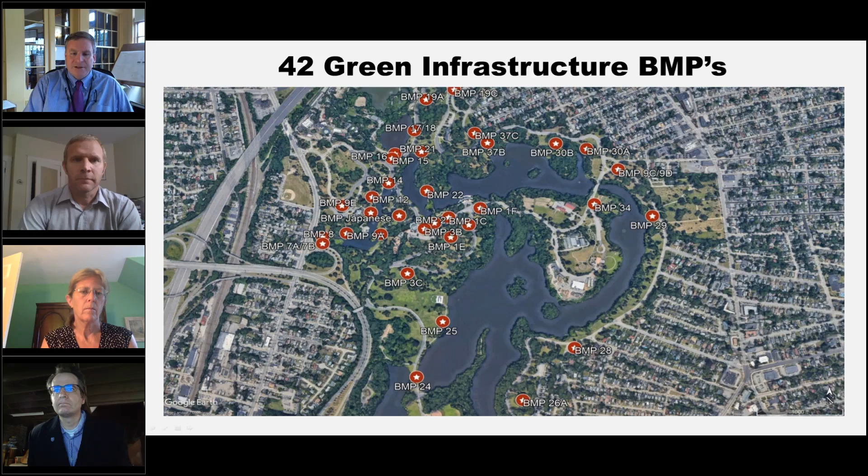The projects, 42 of which were completed in 2 years due to a funding deadline. We had 5 years to do it, but we did it in 2 years. So we had a good group on that construction project between the consultants and the contractors, and we were able to work it out. So what did we learn?

There's 2 schools of thought from what I've been learning. One is use a street or roadway as the overflow, so allow the low flow in and let the high flow go by your BMP and use that as an overflow. The other one is to bring all the water into the structure, provide an overflow pipe, and let the water flow back the same way it would as if it was bypassing it. So 2 very different schools of thought based on 2 different designers' opinion of what should happen.

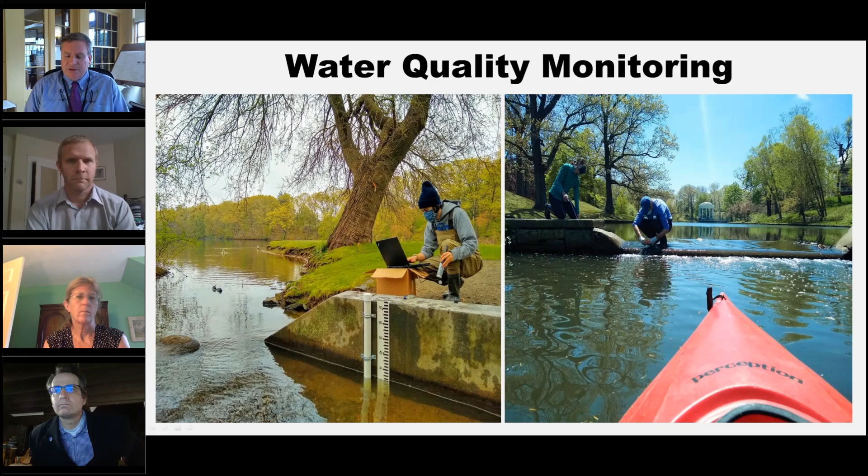So innovations in stormwater design. We want to know what you all are dealing with. If you're a landowner or a municipality, we want to know what you've done in your backyard or in your park to create better stormwater.

And that's what it is, collaboration. We want to bring everybody's ideas together, get together, talk with everybody about what they're doing, what they see. Send your information into us. We'll bring it to a common place that's globally available to everyone.

And then if you get a consent agreement, you don't have to start from square one. Hopefully we can get you to square 10 before you have to start your projects.

On the slide you're looking at now, to the right is the seal house. Way back when, Roger Williams Park Zoo had housed their seals and sea lions there, but the building cantilevers over the waterway. So a lot of our monitoring equipment is mounted inside this building, goes right through the floor into the water below. So it's a perfect setup for that type of testing, and it's been very successful. When they built the building back in 1893, maybe they had the stormwater in mind, I'm not sure.

But that will be a kiosk, not only for research, but for outreach to the public, for education. We'll bring students into the seal house, show them how it's working. There'll be video screens running with some of the stormwater things we've done and how they work. So we hope to make that a location for people to come and learn about stormwater.

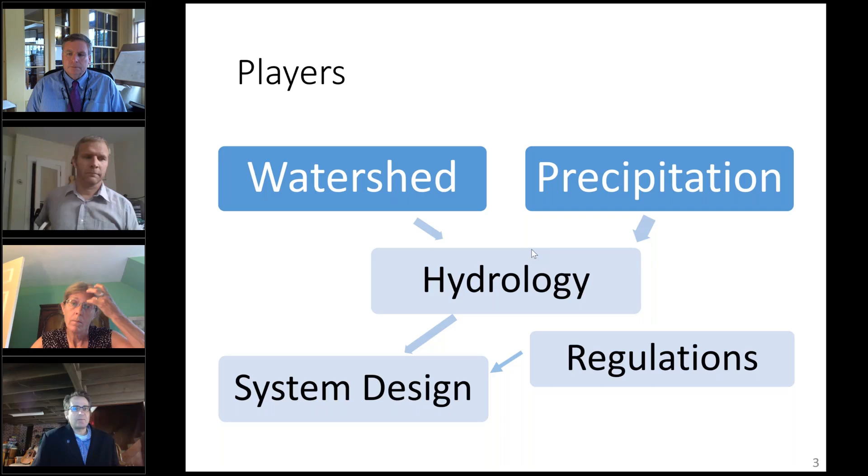So we're not generally managing the 100-year return event. Obviously, the watershed characteristics, the land use characteristics, and the precipitation, particularly design precipitation, dictate the hydrology you're designing for, and also in there are regulations. One interesting thing about making this type of information available: if you're in the field, you've found, as we all have, that the science is changing pretty fast and dramatically. In New Hampshire, our stormwater manual was passed in 2008, and that was probably a 5-year effort to develop that manual and get it into statute.

2008 is ancient now, so lots happening largely from the learning from the increase in implementation. So I'm going to just at liberty skip over some slides. I apologize for the delay in the beginning.

Obviously for hydrology you're going to need some additional land characteristics, things like slope, and I'll talk a little bit about slope as it pertains to system design as well. Then flow path, typically we're calling that time of concentration. It's one of the biggest errors we see when we review plans: people misinterpret the time of concentration. Oftentimes it's noted as the longest distance in the watershed, and that's not really the definition. It's really the longest hydrological flow path. So for the most part, at least in the hydrology, that's one of the biggest issues we see.

Beyond that, what we see in the issues in modeling is not honoring or adhering to pre-development subcatchments. One of our design intentions is to maintain the pre-developed condition to the extent possible, largely hydrologically. What I mean is, oftentimes what we see is you take your site, and where you want your stormwater feature is often known, so you delineate your site, and your point of analysis is where you want the discharge for your developed condition.

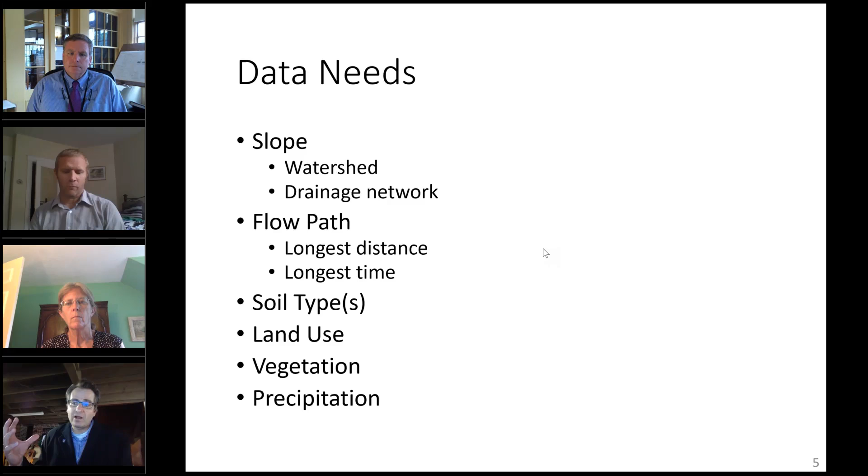And then finally, not taking into consideration off-site drainage. You have your property lines, but the hydrology doesn't always honor the property lines or the political boundaries—it honors the watershed boundaries. So you could have large amounts of water coming in from off-site. Those are the typical common mistakes that we see.

Yeah, it's one of the things we'd like to address better in at least the hydrology component. Now, getting into design...

One of the current arguments or haggling we have these days is with pretreatment. If you look at many of the manuals that are out there, they all include pretreatment as necessary. Pretreatment is often a structural forebay, and it's often sized for some percent of the water quality volume, or it also often has some volumetric sizing criteria to it.

So the question obviously comes in is, as you're redeveloping or retrofitting—or even for new development it's not as big of an issue—this idea of the configuration of the pretreatment, what does it look like? And I think we have more options than many of the manuals allow these days.

If we go back to the intention of pretreatment, it's to facilitate routine maintenance. So you want a place to take out the shopping carts and the bowling balls, the large coarse solids, and you want something that you can maintain easily and more frequently. That's largely the intention.

There was never an intention that the forebay offered some type of flow control or water quality control. It's strictly for ease of maintenance.

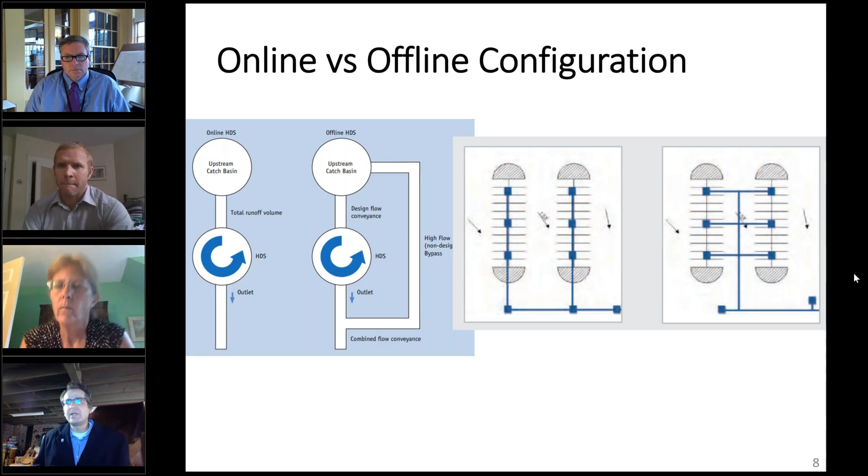So this is the coarse stuff. Some of the gross litter, leaf litter, and other gross solids get removed here and can be easily maintained. If you're trying to maintain these street trees or tree filters in the cityscape, a lot of times they have grates that are difficult to remove, and oftentimes we don't have equipment for this. For the most part, our go-to maintenance is a Vactor truck, and you can't really do much with a Vactor truck here.

So this is one of the things that I think will happen over time. We are planning a maintenance course, and I expect we'll see innovations in maintenance tools as we understand the maintenance. Right now, I can say pretty safely that in general, the go-to maintenance operation is just neglect. That's not everybody, but for the vast majority of stormwater treatment systems out there, I know I've written a bunch of operation and maintenance plans, and I know exactly where they go when we hand them over.

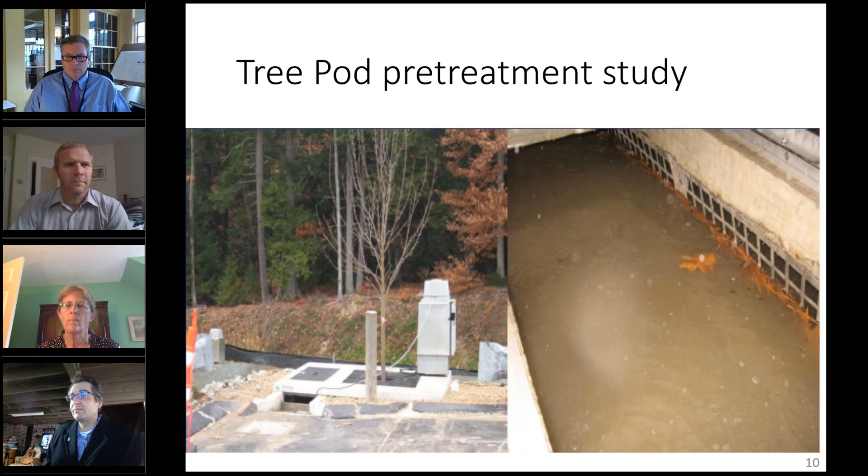So I'll move into this - essentially, I am only going to be focusing on the enhanced treatment systems, what we would call filtration and infiltration best management practices or stormwater control measures. For the most part, as we enter into the 21st century, if the state manuals haven't gone there yet, many of the local requirements - and particularly if you're from Massachusetts and New Hampshire, we have the pleasure of not having primacy over the Clean Water Act. EPA Region 1 does, and they've written our permit for us, which has some pretty stringent parameters around requirements for stormwater controls. For the most part, while they don't do it explicitly, implicitly they're requiring filtration and infiltration BMPs because they're requiring increased removals of sediment, phosphorus, and nitrogen.

And certainly, if you're in the stormwater game, you've probably witnessed in your career this transition from a huge focus on TSS and sediment to now a larger focus on bacteria and nutrients - nitrogen and phosphorus. So we're a long way away from where many of these manuals were written, and most of the water quality guidelines now focus on nutrient control. If you're coastal, it's nitrogen; if you're inland, it's phosphorus for the most part. So I'm going to focus on filtration and infiltration BMPs, and that's largely how the rest of this is going to really be parsed out.

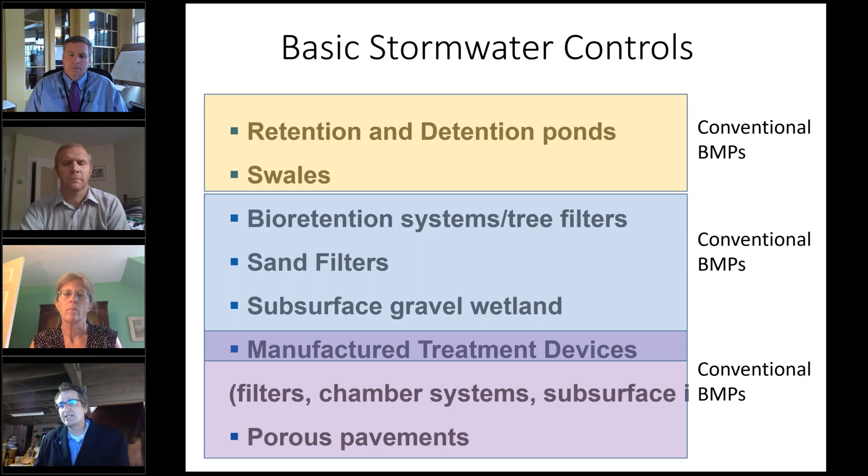Bioretention systems, I think, are the primary systems we see from a filtration perspective. It's important to note that filtration systems are typically volumetrically sized, and they can infiltrate—but they may not. So they're versatile in that you can put them in areas where you wouldn't put infiltration systems, say where you have concerns about contaminated groundwater or the general geology—it might be karst, or if you're in Pittsburgh, you're concerned with acid mine drainage and nobody's putting water into the ground. In that case, these systems would be lined, either with a compacted soil liner or an HDPE liner, but you still get the filtration function.

If you're putting a bioretention into a good soil and anticipating a lot of infiltration, that infiltration will really dominate the performance of the system. We see that the hydrology of these systems dominates performance. This is another area of research—I'll get into it when we discuss infiltration—but there are lots of preclusions on infiltration, and for good reason, though there might be some over-conservativeness there.

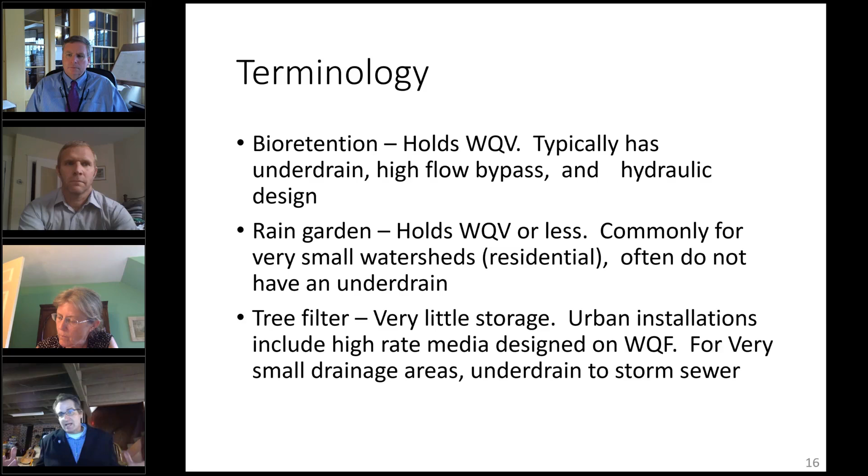So it goes without saying that there's a lot of cooks in this kitchen. If you Google bioretention design, you get 381,000 results in 0.03 seconds, and some of them are going to work really well. Our friends in Connecticut pop up very easily - they've got a really good updated manual and standards, but you'll also see a range of different criteria. I don't know how many of them are tested.

We're in a transition stage where we're replacing some of the old Maryland manual standards, because for the most part, if you open your design manual from any state, you're seeing the majority of content that comes right out of the Maryland manual that Center for Watershed Protection did for Maryland, the birthplace of LID, 30 years ago. Not a lot has changed, although we're slowly updating the standards. But if you've been involved in updating a manual, it's not an easy task - you don't just write it and put it on the web.

These are typically the components of the bioretention system. Again, you have a forebay - here we're showing a structural forebay. This is kind of like our own schematics, and cartoons are a little bit antiquated, because we're showing a structural forebay. I've already gone over the fact that we look at the forebay and pretreatment a little bit more flexibly now. It could be any pretreatment structure - could be a hydrodynamic separator, could be an offline deep sump catch basin. But whatever it is, that then goes into your main treatment cell.

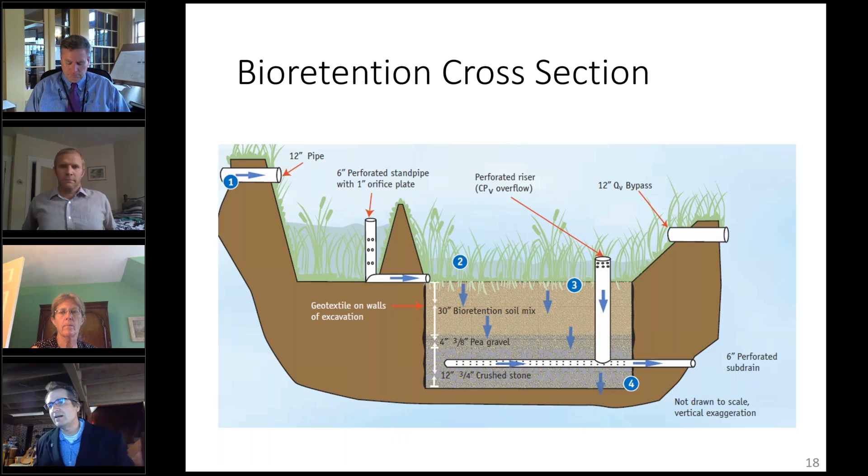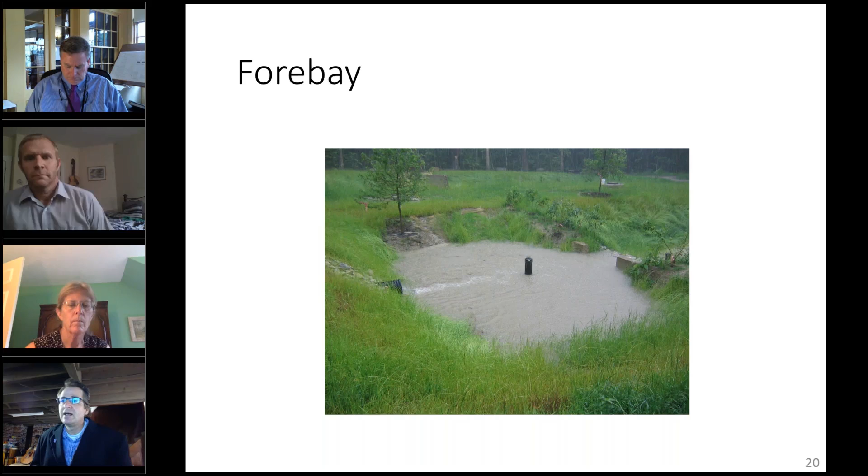Just cruising through some pictures. These are some of our early attempts at large structural areas that treat large drainage areas. This one treats about 1 acre of impervious surface. We got rid of the forebay really quickly because we found it was very difficult to maintain, so we went for a low profile instead of a huge volumetrically sized structural forebay. We just had a berm of stone that gave us separation and screening for the shopping carts.

We've also been experimenting with these curb installations, where we introduce a curb cut and excavate a depression. Nobody can tell me why every single median strip out there is mounded. The best explanation I've heard is it's a liability to prevent cars from getting stuck, and I have seen cars stuck in bioretention systems, so it could happen—people pop the curb and the frame of the car sits on the curb with the wheels spinning. But if you go to any mall anywhere in America, you see these median strips are mounded, so it becomes a kind of negative space.

So it's an opportunity when we're looking at retrofit. We have a nice no-cut zone because we often see planting material just get weed whacked as people are mowing these areas conventionally.

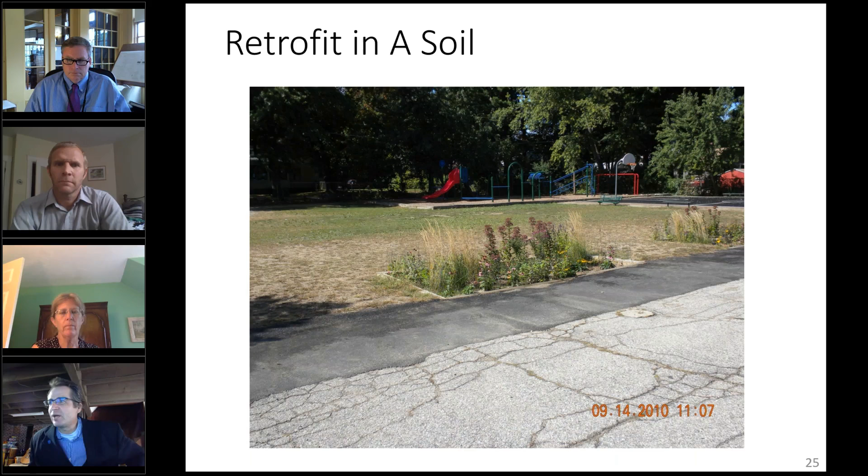I love a drop inlet because gravity never fails. However, if you're having an at-grade inlet to your system, you have to make sure the opening is wide, and that the slope into the system is aggressive enough that the water changes direction.

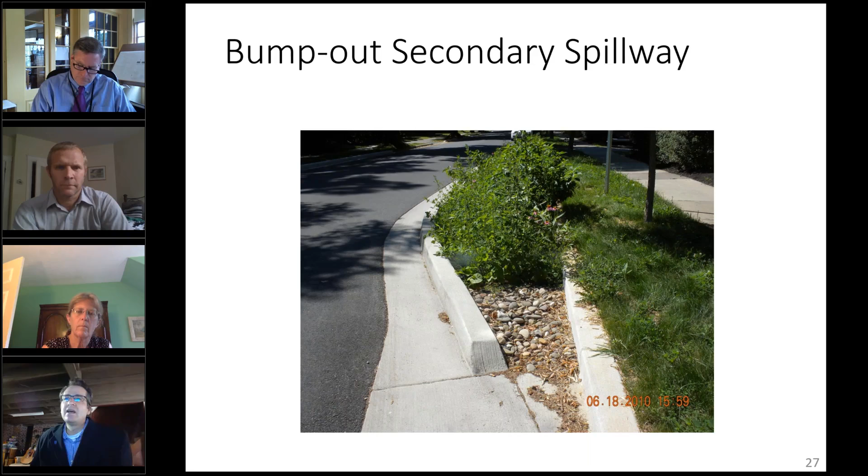These are very simple things we can correct. The other thing here is, I can't really tell, but if I'm a drop of water, I'm looking at this grate and saying, that's where I want to go—I'm not looking at a huge turn, a 180-degree turn, into the system.

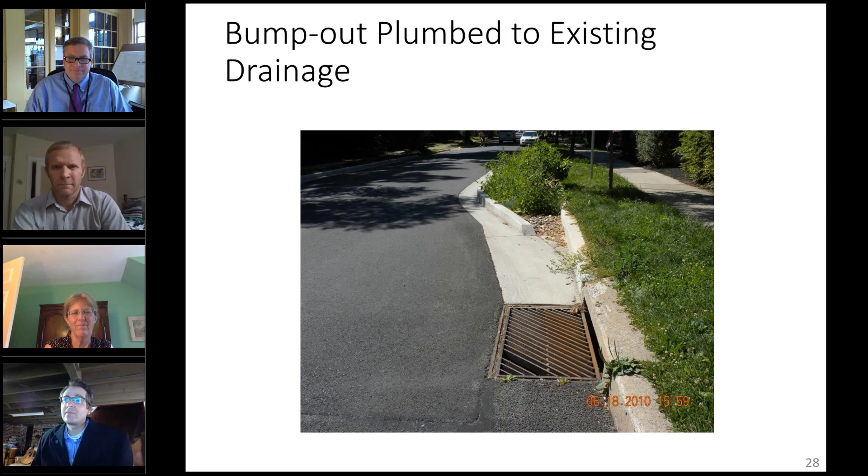Tree filters are out there. They are very simple in nature, and again, we're trying to do the research. Now, trees have lots of ancillary benefits.

If I were to design something, I could not in my whole entire lifetime design something as amazing as a tree, something that produces its own food, sequesters carbon, provides habitat, releases oxygen. The list goes on and on.

However, we have not, in a stormwater application, pinpointed the exact functionality from a water quality perspective that the tree actually has. Obviously it's something, but again, the filtration component through the physical filtration through the media probably dominates the performance of these systems.

Tree specification is something we're working on. Myself, we generally spec out a red maple. However, there are other trees out there we'd like to look at, just not a lot of data here. We do have a publication I'll link to you, where we worked with our urban forester to at least identify street trees that could be used.

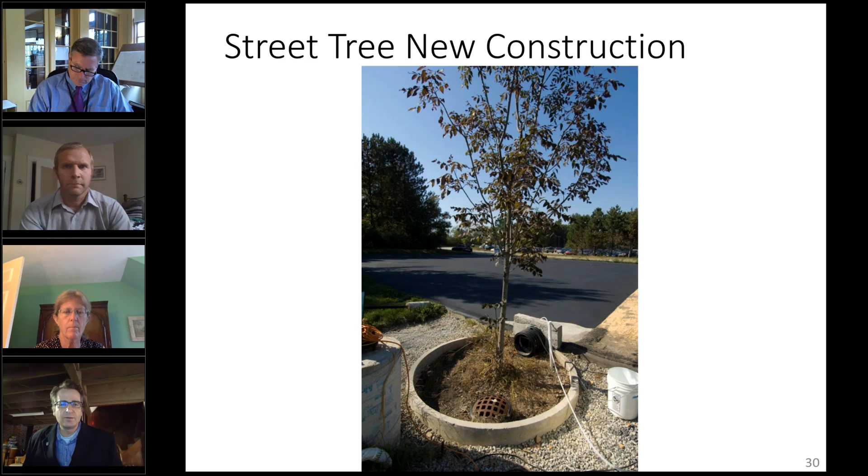I'll just cruise through here. There's retrofit potential for these adjacent to existing catch basins. This is just an example of a very simple installation we've done, where we just dig out adjacent to an existing catch basin.

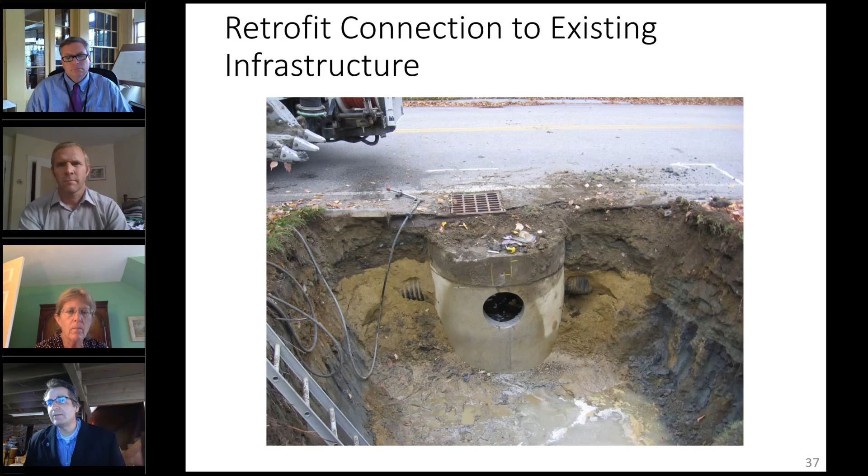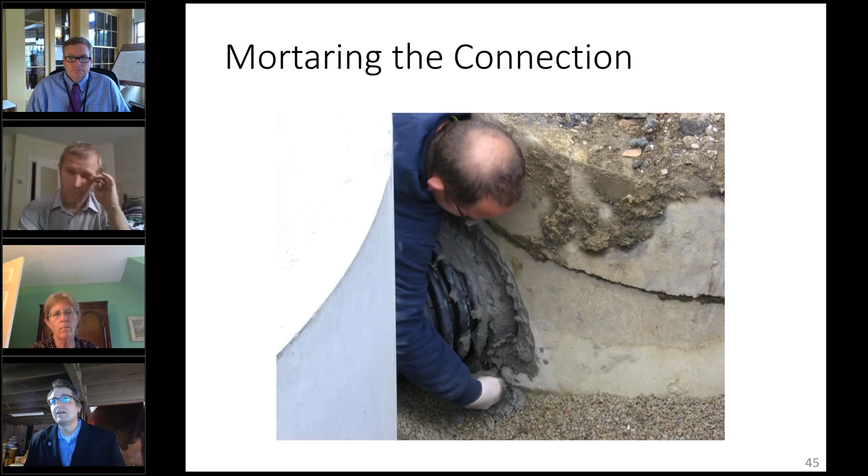We essentially excavate, core into it, backfill with stone, drop what is basically a manhole riser, backfill, connect that to the existing catch basin, backfill with stone, soil, provide our overflow riser, provide our inlet, plant our tree, and then put a solid cover on the tree filter. We've done this in retrofit applications to enhance some water quality benefit into the existing landscape.

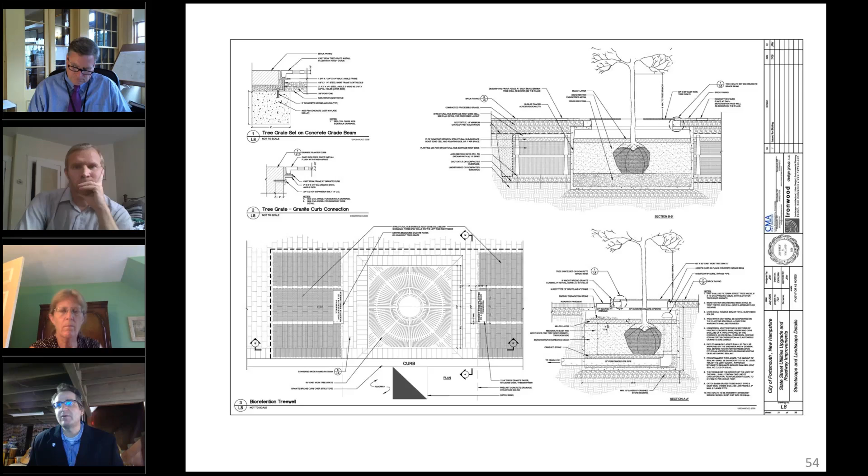There are other proprietary devices that can do this as well. This in particular is a tree pod. We've also worked with cities to install large structures in the cityscape that provide some benefit of a street tree, but also give an area for the tree to expand and grow, and provide us some water filtration benefits. So those are just some examples.

If we look at design now, there are three main design methods out there for these types of structures. One is to do a dynamic sizing based on an iteration of Darcy's law. This is the equation you see here, in many manuals, where you calculate your area of your filter by your water quality volume, multiplied by some dynamic infiltration capacity.

If you're using 0.05 inches an hour, this is not going to work out in your favor. But typically what we'll do is anticipate an infiltration rate and multiply that by 0.5, taking a factor of safety of about a half to build in some potential clogging. That is very, very conservative, I think, and you'll see why in a minute.

The other ways are static sizing, where you just instantaneously plunk the water quality volume into your system, and you can use it, or develop a runoff coefficient that's in many of the manuals. I'm really loving this Philly method here, where you calculate your water quality volume only based on impervious cover, essentially not including pervious areas, and I'll tell you why.

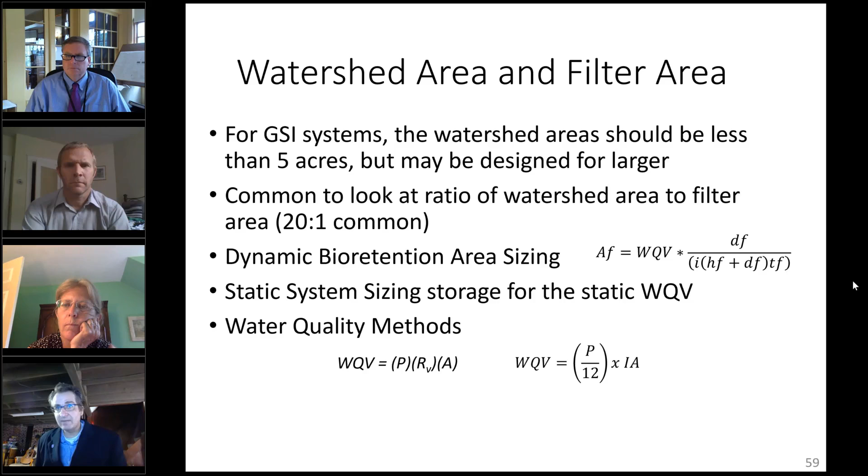So rights of ways, I kind of covered this a little bit. In general, we're not putting these systems, if we're anticipating infiltration, in areas of high pollutant load, or we're lining them. We'll return to this when we talk about infiltration. There's lots of soil restrictions when we look at systems being installed according to some of the state manuals.

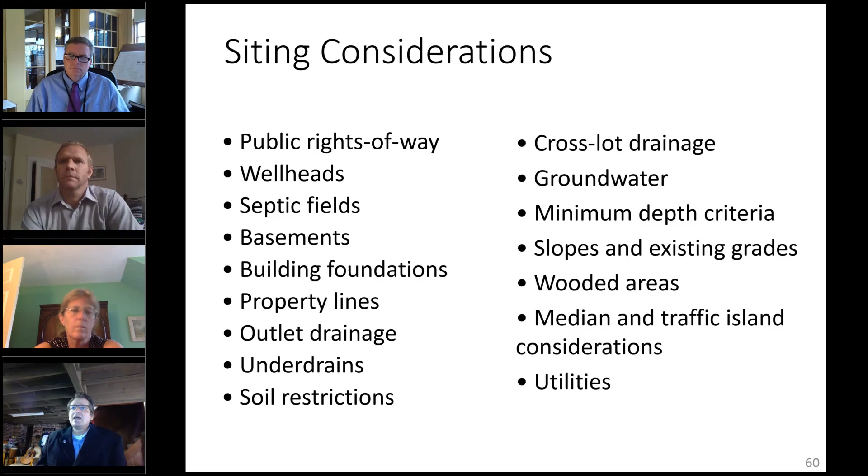But I wanted to just focus on slopes, because oftentimes we hear that these types of systems can't be installed in areas with significant slopes. We have installed them in the past. Generally, what we do is we want the surface of the system to follow the landscape slope.

Here, this is a roadway where we install the bioretention. The top of the media follows the 3% grade on the adjacent road, and we do that largely to maintain a consistent system. Otherwise, if we kept the surface flat, we'd have a huge hole in the front and level out in the back, and we really don't want that—think cars being trapped in the bioretention system. Not a good photo opportunity.

So we like the top to follow the grade, but the bottom we design to be level. So the bottom gets terraced. While the top follows the grade, our bottom basically steps down. Here we have basically 3 steps down. The system is about 100 feet at a 3% grade.

Every 33 feet, we go down a foot or so, and we just terrace it. So we have 3 basic bays here, so that the bottom can remain flat. We do that largely because what we worry about in sloped systems is concentrated and accelerated flow along the confining layer. The confining layer at the bottom of the system is where the stone meets the native soil. If you don't have restrictions there, you can get accelerated flow along that layer, and you can get pushing and piping and soil disturbance, which affects the integrity of our system.

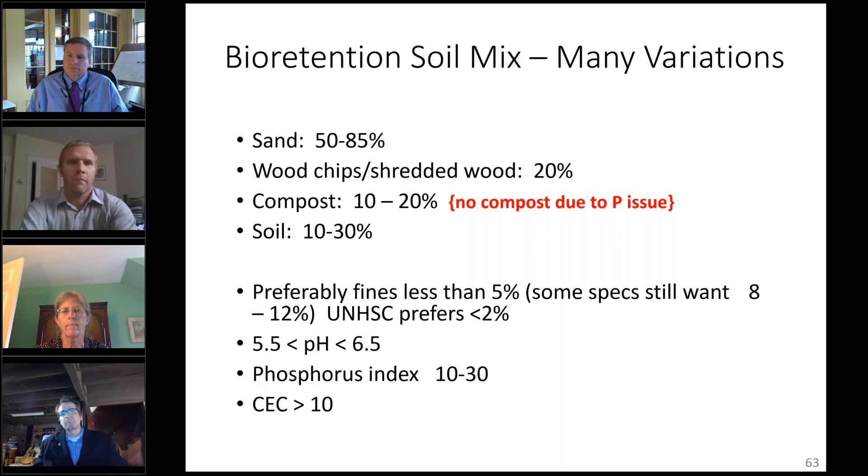And then we can get kind of experimental with our compost loams and soil amendments. Sorry, I kind of skipped ahead of myself. Here's the particle size distribution that we've developed. Again, this is on our website.

I might be able to show you that real quick. Let me see if I can do this. I'm playing with fire here. Playing with fire. Where did that go? No, I'm not going to do it, guys.

UNHSC, Google it, we're the first thing that comes up. If you go to our pub specs and info, we have detail on bioretention soil mix. It has some of the ratios and components, and also a particle size distribution that is a way you can test and make sure hydraulically that your system's going to stand up.

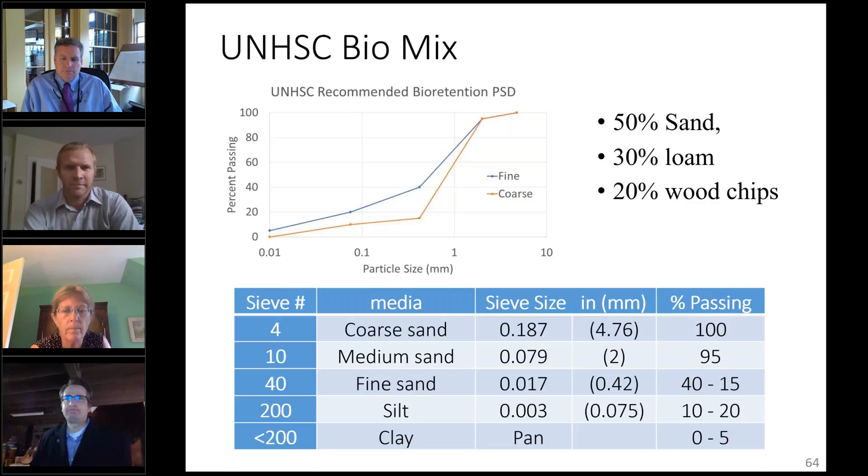Good. The last thing I'll talk about is, I told you to get rid of geotextile in the vertical cross section, meaning the unmaintainable layer. If I put geotextile under 24 inches of bioretention soil mix, you're going to move heaven and earth before you get anybody to maintain that, right? You'd have to excavate your whole entire system.

Where this doesn't apply is when it's accessible or maintainable, such as in isolator rows in chamber systems. Oftentimes a woven textile is used in the isolator row, and that's fine. It actually does a great job of filtering. The woven textile is stronger and doesn't clog as readily as non-woven, and we're finding it creates an organic humus on top as it removes organic debris and other things, which accentuates phosphorus removal.

Those are fine, you can open the hatch on a catch basin and get a hydrojet down there. It's accessible, it's cleanable, it's maintainable. A geotextile between the bioretention soil mix and the stone layer in a bioretention system is not. So we generally eliminate them.

And what we use is a graded filter specification. This comes out of Federal Highway, and it's also used by the Army Corps of Engineers. It's basically an inequality calculation between your fine materials above coarse materials. If they satisfy these 3 inequalities, it can perform as a setting bed, meaning you can be relatively assured the fine materials won't pipe into the coarse materials.

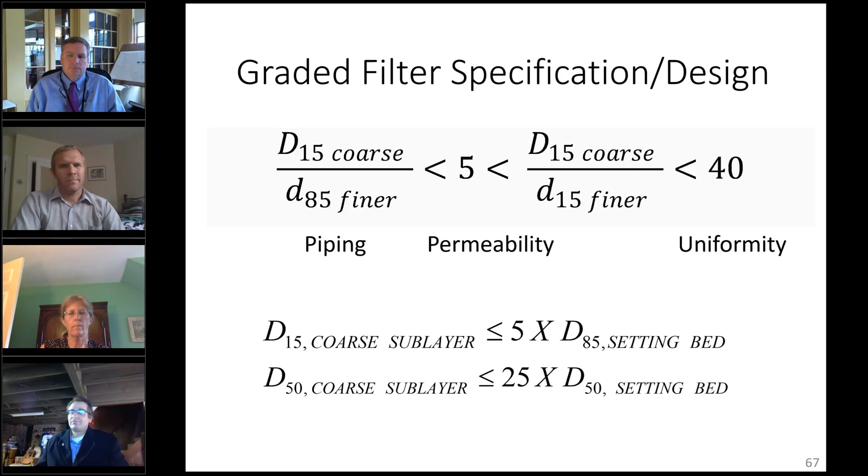Now, amendments, because of this phosphorus removal capacity and the lack of ability, as we move these soils to higher and higher flow rate and infiltration rate, means we go to more organic material. If you think of a rain garden, a lot of it is 50% compost, 50% loam. That's going to have plenty of organic material, plenty of absorptive capacity, and it might even be leaching if that compost is not a low P compost. So what do we do? We don't want that happening in our phosphorus threatened waters.

Now we have to look to some type of amendments. And this is where it gets fun, because we can kind of Frankenstein these things together such that we're better addressing our pollutants of concern. So there's a lot of proprietary stuff out there, absorptive material for phosphorus binding, enhanced phosphorus scavenging.

We found essentially zero valent iron and a drinking water treatment residual that we post-process to be really good and really cheap at scavenging phosphorus. There's a PhD finishing up at University of Vermont publishing on the use of drinking water treatment residual, and basically confirmed what we had already found, that you can get anywhere from a 20 to 85 year lifespan out of the use of a drinking water treatment residual at about 5%. Same thing with zero valent iron.

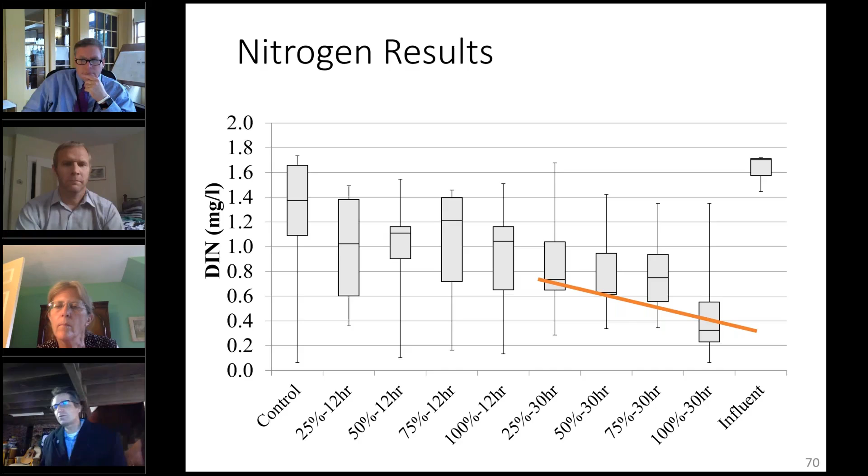So we have a design specification for a hybrid bioretention system because we have nitrogen problems here on the coast, and the criteria is enhanced nitrogen removal. If you're in good soils, there's no way that you want to line that entire thing. So what we're building - and I don't think I have a picture of it, but it's on our website - is a first flow cell through what's essentially a subsurface gravel wetland in the middle of a bioretention system. I'll go over that a little bit more when we get into the gravel wetland.

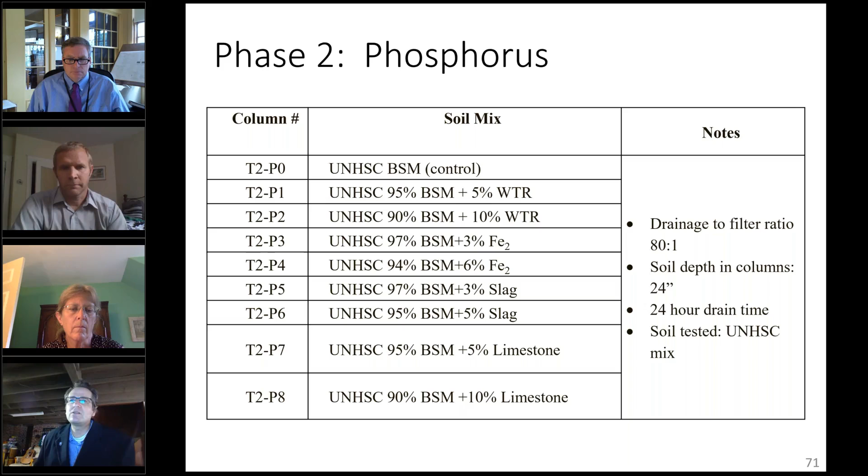We've also seen the use of expanded shale aggregate, and it all comes down to cation exchange capacity. We've done studies on expanded shale, and what's interesting is they come from different parts of the country, and some parts have a higher charge than others. We found the stuff coming out of New York to be really good - high cation exchange capacity, really good phosphorus removal. So just something to consider, that there's natural products that can be harvested, that can be used, that have this cation exchange capacity that we're basically amending with the use of polyaluminum chloride. Not to mention that it's a waste product.

Again, if we can reuse it, the university and their drinking water treatment plant will give this to us all day long. So very good removal here. And then, like I said, we've seen about a 20 to 85 year sorptive capacity with typical stormwater phosphorus loadings.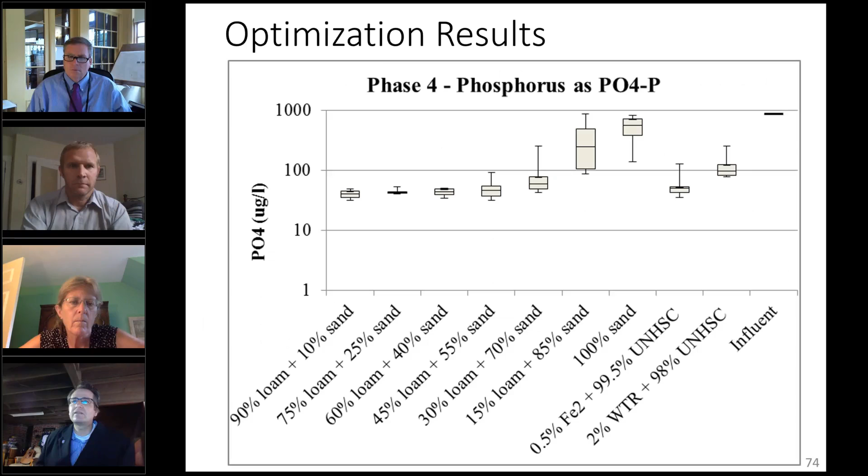So media thickness, often a question. Again, anywhere from 12 to probably 30 inches is what's most common. For the most part, because much of the physical straining is happening within the top few centimeters, you're probably sizing media thickness more for vegetation sustenance.

If you're using media amendments and you're increasing the residence time, you're largely doing that through some outlet control, like orifice control or something in the outlet. You're not really designing that into your system.

So I talked a little bit about this internal storage reservoir. For the most part, you can see a detail on our website where we're getting away because we have some empirical data on something that's 10% of the water quality volume. So our internal storage reservoir, the physical storage capacity in the length and width of this kind of first flush flow cell, is 10% of the water quality volume. Sounds familiar, sounds a lot like our pretreatment sizing of our structural forebays.

And we're finding that those do well as long as we can keep the residence time in there. And we also see that nitrogen, and phosphorus for that matter, is very first flush weighted, meaning it comes off in the first 1/10 to 2/10 of an inch.

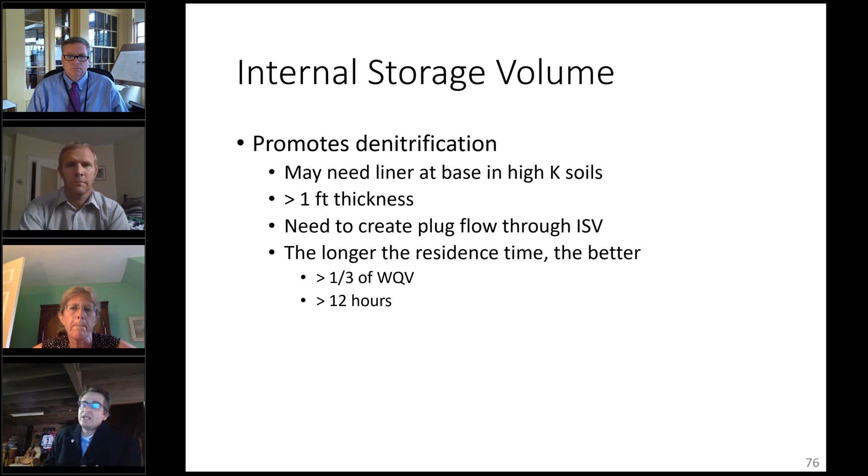So what the plumbing of that looks like is basically in your reservoir stone, you're just creating a saturated zone with an elevated outlet. And oftentimes, if you're in good soils and you're lining this somehow, and you're lining it not only in the sidewalls but on the top, what we're doing here is trying to create plug flow. So if you didn't have this liner in the middle, water would come down and just short circuit this whole reservoir and go right to the outlet.

So here we're basically creating this flow path that runs linearly along this liner, installed at a negative slope into the stone, and then through 15 to 30 feet of flow through the saturated zone.

So again, we've installed two of these, but our Department of Environment is requiring them more and more for nitrogen control. And it's exciting to see more engineers get into the business of doing this. It's fun, it makes the design a little bit more interesting. And every time we install one, we learn a little bit more.

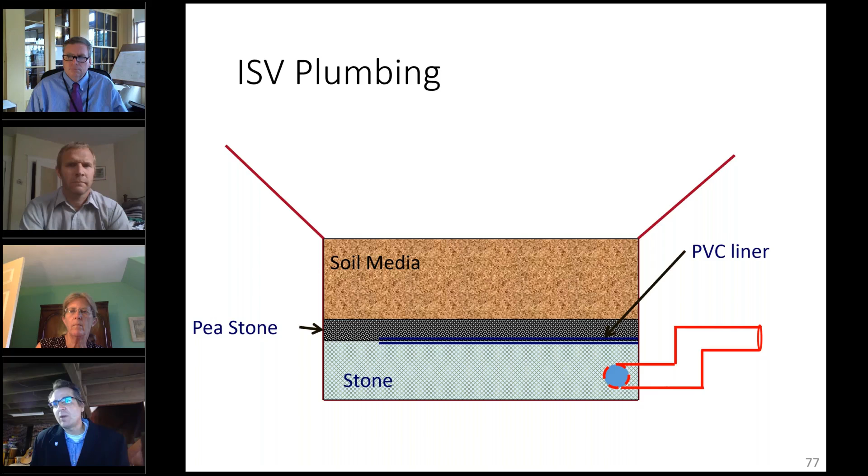Okay, to mulch or not to mulch. So I think Roger Williams Park is a no mulch facility. Is that right? Yeah, so I'm in the no mulch camp. There's plenty of people that I know that are in the mulch camp. I think it depends on your area, the level of maintenance you want to do, and how your crew is set up for maintenance. For my purposes, I'm usually designing larger systems that treat larger areas.

And no matter whether the mulch is triple shredded, quadruple shredded, hardwood, softwood, wood floats. And so if we're directing a lot of flow into an area, we always see that mulch shift and push, particularly to the back of our system where our high flow bypass contingencies are. And you can see some of that happening here. This isn't even a mulch system, this is just normal debris from some of the vegetation, from some of the organic material that's been collected in here, pushed to the back.

And it's usually why we use beehive structures as opposed to flat structures on our high flow bypass controls. If you use a flat surface, then you have a one-dimensional clogging front. If you use a dome, you have a multi-dimensional clogging front. So you can see I'm clogged here, but as the water rises, it's going to access more area because of the dimensionality of the dome. So something to consider.

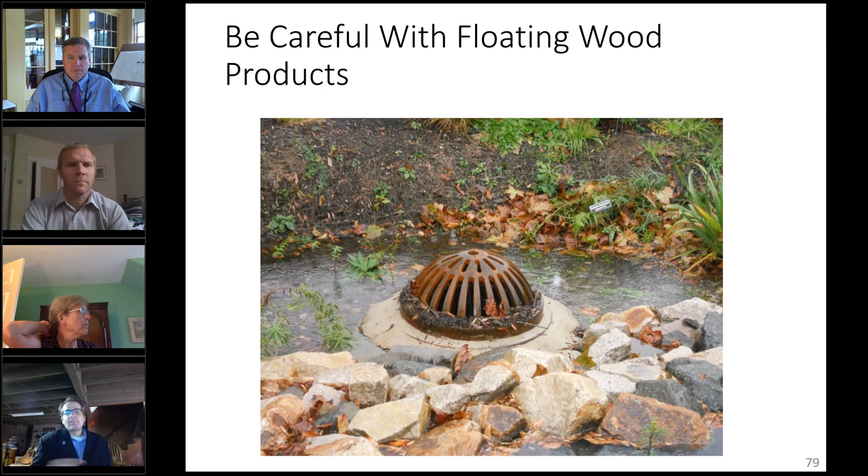Drain downtime is another design contingency. Oftentimes we see bioretention systems, people wanting to use them for peak flow control as well. So it's possible you're building a larger basin, a smaller filter area within a larger basin, and you want to allow for more storage depth above the filter.

In general, we see ponding depths of anywhere from 6 to 24 inches. If it gets above 24 inches, then you're doing two things. One is you're potentially changing what types of plants might occupy your system—they need to be able to withstand that inundation.

Two, you're also creating a driving head that could push material through your filter system and push some of the fines out. We did design a sand filter with a 6-foot ponding depth, and I wouldn't recommend it. It didn't get very good performance, and we felt that buildup of driving head pushed stuff through that filter and led to lessening of the physical filtration capacity. So, 6 to 24 inches in general. There are instances where you might get away with more or less—at that point, it's just engineering judgment.

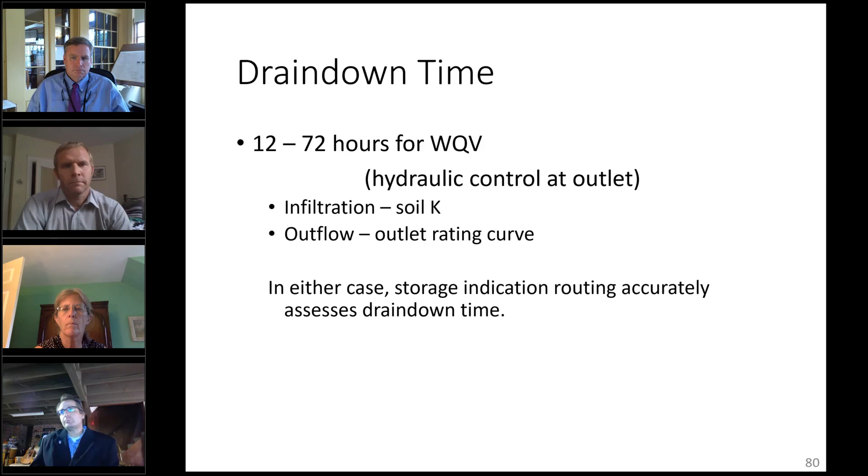And then vegetation. I've really taken a laissez-faire approach to vegetation. My point would be, I'll take whatever I can get. We're so behind in stormwater management, I kind of feel like if you want to grass it, great, if you want to plant it, great. This might sound to some folks like I'm a plant hater, but I just think we need to do more.

I'll illustrate some of the lack of detail that's out there—there's not a lot of good sources for information on plants. In our manual, and I can pick on New Hampshire, the 2008 design manual tells you for plant selection to use this national list of plant species that occur in wetlands in the Northeast—facultative wetland plants. I guarantee none of the plants selected here will survive in bioretention systems designed to the updated specs for soil, because if your system is 50 to 85% sand, it's virtually a desert to facultative wetland plants.

So it's kind of funny to me—this is still there, still in our manual. It's a good illustration of how much more research we need on the plant side. Most manuals are out of date like this. And if I can save you a few thousand dollars on plant species, then my job is done.

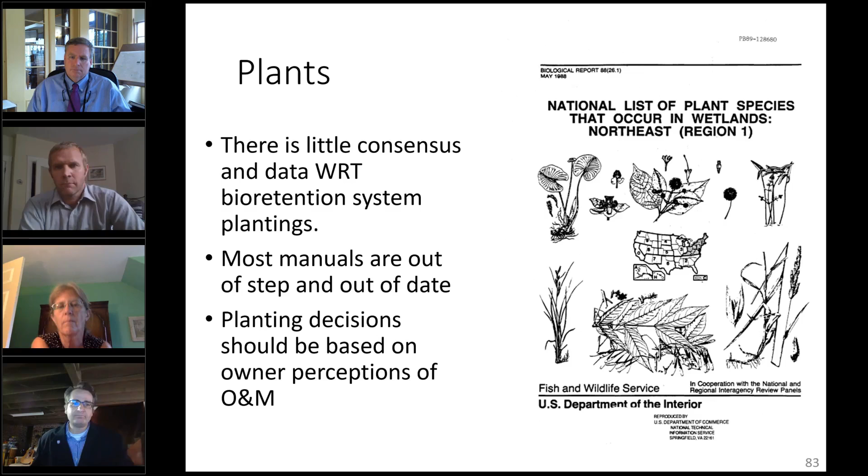So there's that. For trees, I put our link here. If you go to the front page of our website, we have a report—not actually new, but new online—with our urban forester that identified different tree species that could potentially be used in these tree filters. So that's something to take a look at. We haven't done a lot of research on it, but...

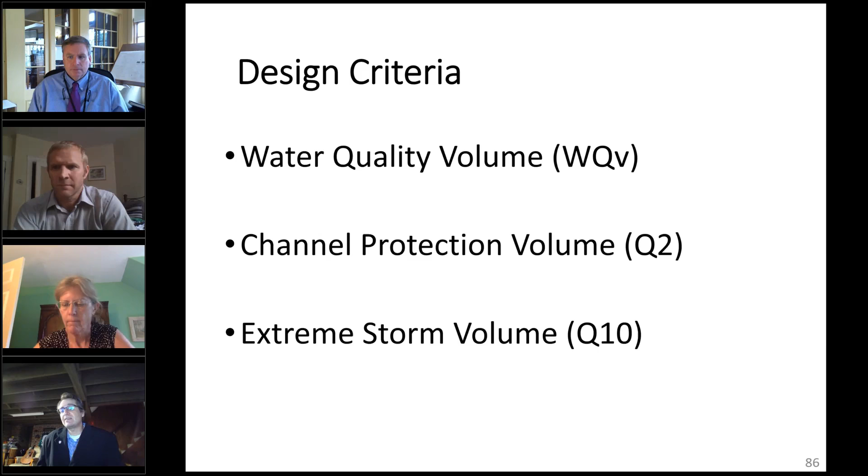So the critical design elements really are some form of pretreatment. Again, it doesn't have to be structural. We've designed these with offline deep sump catch basins, and they work fine.

I just published a paper that's on our website on the history of the gravel wetland. If you want to look into it, it was traditionally used as a wastewater treatment facility. If you go back into the old days in South Burlington, John Todd, who worked with Living Machines, actually successfully treated 500,000 gallons of raw sewage through a wetland system filled with different microcosms and ranges of plants. That's really where this emanates from.

However, this application is very different. The key feature here is water moves horizontally through the subsurface of this system. And we studied a 2 treatment cell system.

We did 2 treatment cells largely because the design specs were largely adopted out of the wastewater field, and we wanted the ability to shut something down if it got foul. So we could shut one of these basins down and route everything through one of the other ones. I think that's a contingency that likely came up when they were considering back-flushing these if they're being used for a wastewater type of application.

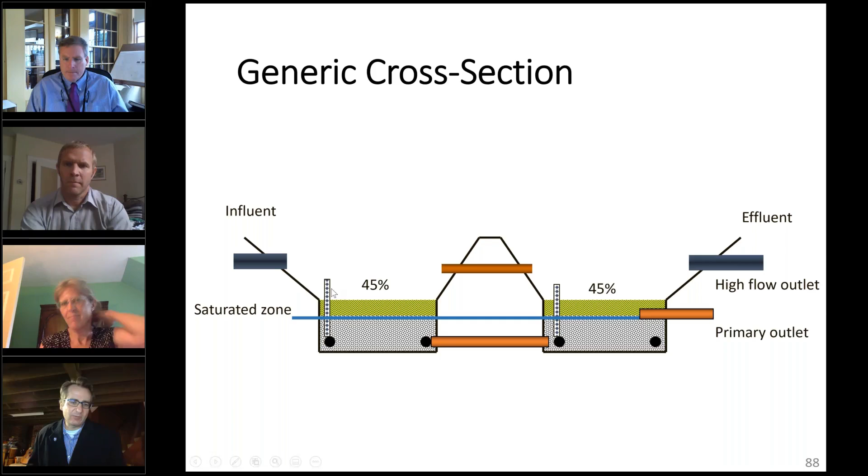So we're not anticipating vertical infiltration through the soils - that would largely tend to short circuit our plug flow. So we have some type of hydraulic inlet at the front. Here, it's a perforated standpipe. There's other configurations that I'll get into, and we want water to flow down into the system - down through the system and horizontally through the saturated stone.

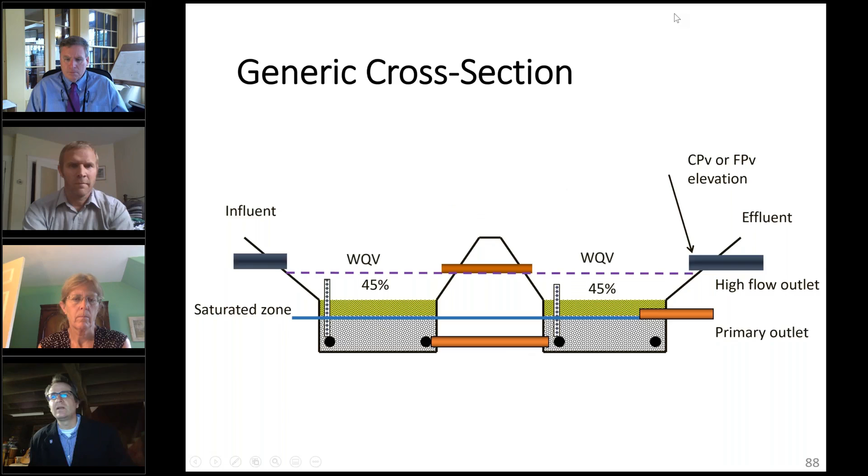So another picture of how this looks. The hydraulic inlet can be a perforated riser pipe. Generally, we don't perforate it in the soil, and then it's perforated in the stone. And there's some headers or distribution lines.

We have kind of adopted a second strategy, and I'll get into that a little bit later. But for the most part here, you've got 2 feet of gravel, you got wetland soil on top, you need a hydraulic inlet, and you need an outlet. Everything else is really, really easy for these systems. You're statically sizing water quality volume in your basin geometry, and that's about it.

So it's as close to pond design as you can get. The only thing that you're doing is you're building the stone reservoir, and you're building up sub-base components of your pond, but everything else is the same as building a pond outside of the inlet and the outlet structures. And I'll get into that a little bit.

So you need some type of way to get water into the surface. Again, we're speccing a wetland style soil. So we're anticipating that over time, this is going to seal up, and we really don't want this to function like a bioretention. We don't want the soil to allow water in. We want the hydraulic inlet to convey all the water.

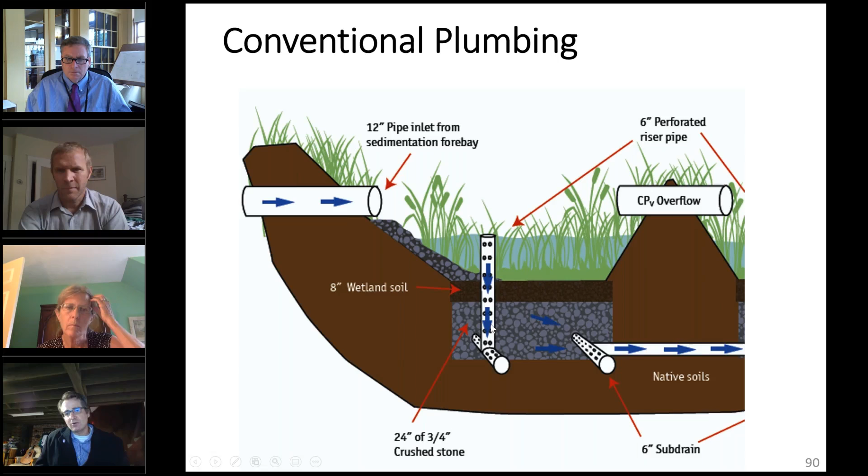What we've done since, because we do have some maintenance issues around with standpipes, they tend to accumulate, especially in the pollen seasons, gunk and other confining materials, the holes. We typically go with a drilled as opposed to slotted. We find that those work better, but often they can be clogged as well. And so typically we put those in as a backup, and our primary hydraulic inlet would be the spillway.

And this is on our website, and it's updated in our new specification for gravel wetland. We have our stone, we have our intermediate pea gravel layer, we have our wetland soil, and then around the influent spillway, we have rock armoring, like a rock apron, like a riprap apron, and below the riprap, above the pea stone, we have a woven geotextile.

Now, this is a maintainable layer. So what I can do is every 3 years or every year, depending on the land use that this is treating, you basically pull back that riprap, pull out the woven fabric, and replace it. That's been a manageable maintenance operation for these style of systems, and I like the way that it really does maintain the type of plug flow that we want.

Then we have the standpipe as a backup. So if we don't get out there as routinely as we want, we still have a secondary hydraulic inlet. And so this is kind of our go-to design now for the hydraulic inlet, hydraulic outlet.

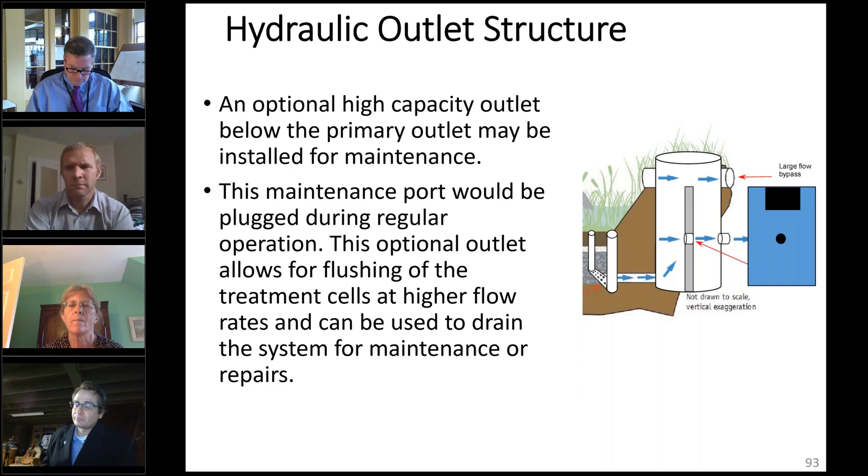And then the other real issue here is protecting the outlet. So I'm going to show you a picture first of what not to do. So this is one of our original outlet structures. So you can see the weir wall in there. We have a plug here that we can remove to drain the wetland. And then we have an orifice for control that you can't see in the actual weir wall.

This had an inlet, so here the basin is basically here. The primary flow path is through the hydraulic inlet, through the subsurface, out through the standpipes, subsurface through the orifice control on the outlet. Our high flow bypass is a cutout here in this structure.

For the most part, we want that orifice in the weir to control the flow. If we're allowing unfiltered water onto the clean side of the orifice, then we're asking for that to get clogged with debris. In the particular instance I showed you, it was clogged by a particularly small frog. Sad story, but it just goes to show it can get clogged with anything: straws, frogs, other debris that find its way in here. So you want to keep this clean, only receiving water from the filter area, and the dirty side then has your grated inlet.

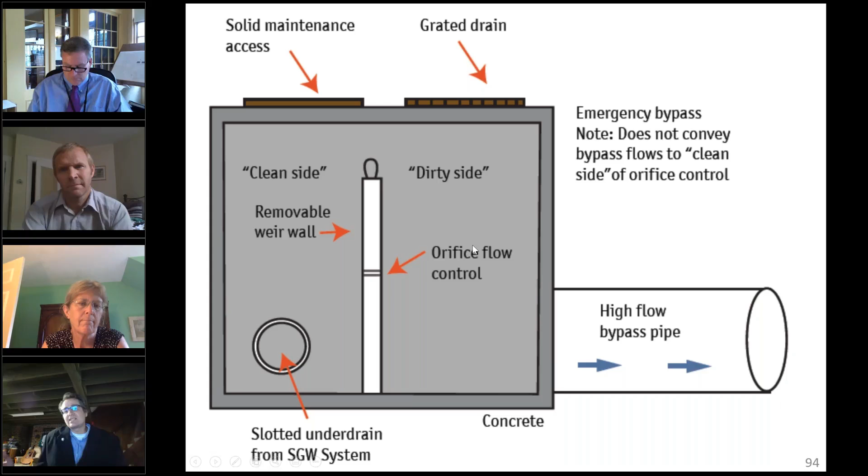It's the only real advancement to this that I've seen. Otherwise, a large outlet structure like this really works well, and it's the outside of the inlet—this is the only other design constraint. In between, it's just a hole with gravel and subsoil.

Additional details here: again, a ponding depth is generally 18 inches. In some retrofit capacity, it could be more than that. For instance, if this were retrofitted into a detention pond—someone asked about whether detention ponds can be retrofitted—absolutely, we could put a gravel wetland right down the middle of a detention pond to convey the water quality flow. Since the inlet and the outlet are at the same elevation, this is highly suitable for retrofitability.

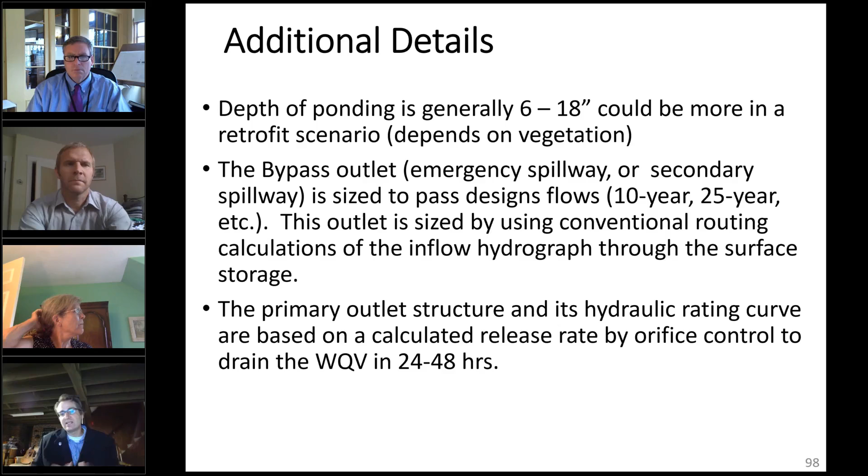Wetland soil specification is something we've struggled with. New Jersey has developed a spec for wetland soils, and we worked with them on that, and with some wetland scientists as well. The idea here is, again, something high in organic material. We're not worried about physical filtration, so it's not majority sand.

It can be made of all kinds of different material, including native cut from your project. We have developed a particle size distribution for the wetland soil. Originally in our spec we had a hydraulic conductivity spec, 0.1 to 0.01 feet per day was our conductivity spec, and it's nearly impossible to spec.

So what we developed in order to spec this—what we were seeing was high variability in materials. We saw people hauling out wetland material with large logs in it. The idea here is that you don't want a particle size large enough to bridge the entire depth of the soil, from the top to the stone surface. If you have large logs that bridge from the surface to the stone, that potentially short circuits the system.

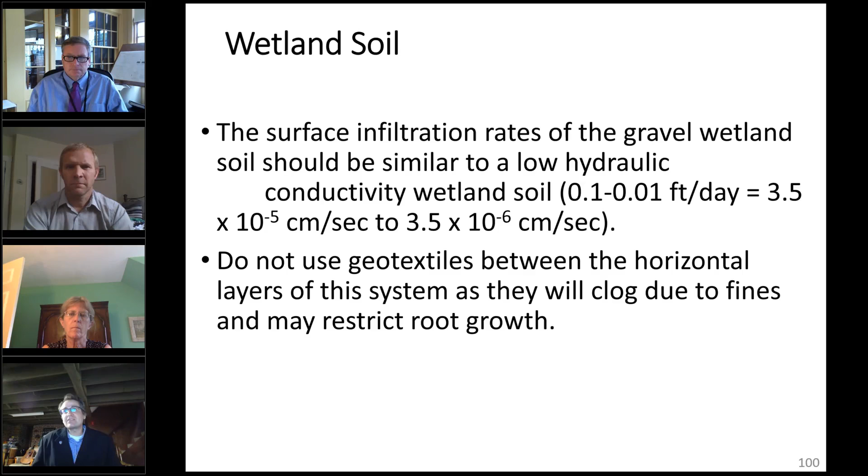So what we did is come up with a particle size distribution. This is in our spec, and again, it's easier to specify and easier to source. Much like where we went with the bioretention soil mix, this is a performance-based spec that is cheap—PSD tests are cheap and readily available.

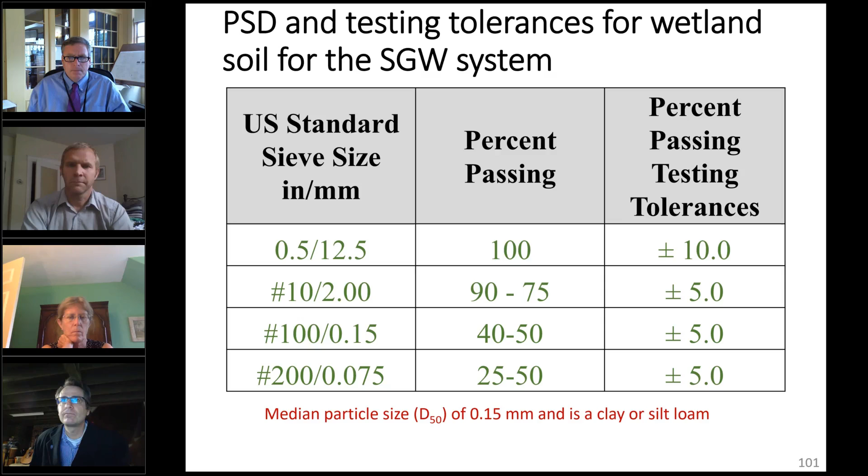Okay, vegetation. Again, with our first gravel wetland, we went with all kinds of wetland plants. We had a 53% die-off rate of our plants. We spent about $20,000 on different plants—$10,000 just went out the window.

So what we're advocating for now is a wetland seed mix. It's about $125 per pound, which will blow the contractor away. Our contractor could not believe it—he thought these were like illicit drug prices. But we've had great success with this.

The conditions here: there should be a reservoir of water available in the subsurface, but not every potted plant or wetland plant actively establishes itself in these systems. It's dry, intermittent storms, so you really have to be robust and develop good roots to be able to tap into that wet reservoir.

So I've even advocated for folks to just grass it so it's stabilized with a contractor mix, and generally species will volunteer. The risk, of course, is if it's not densely populated with the type of wetland plants you want, then you're asking for invasives to volunteer, and they will. For the most part, things we've actively vegetated with this wetland mix we've had good luck with, and not a lot of invasives, because they're so densely populated it doesn't give invasives footing to come in. But if you're taking a more economical approach, just be aware that some of your volunteers might be invasive species.

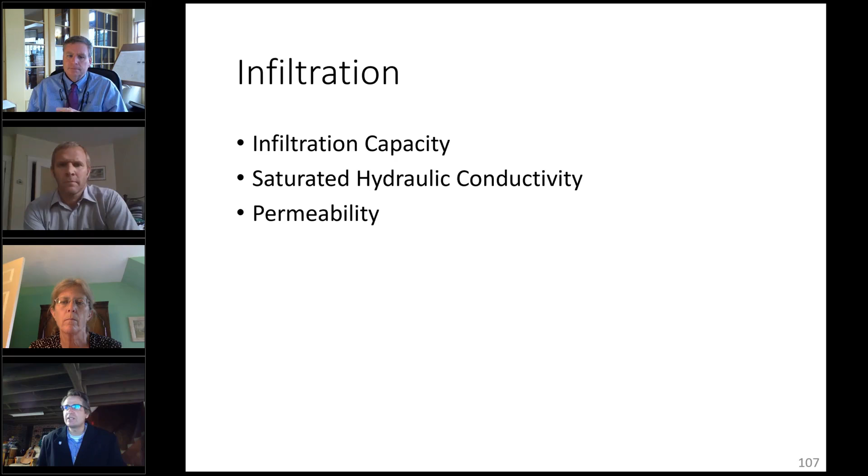That said, there are some conditions around use of infiltration systems that we have to consider. For the most part, we're using the web soil survey - USDA is probably the go-to resource. They have a web soil survey where you can locate any region in the country and get up-to-date information on what that soil type is. Now, granted, this is coarse, and it seems like it's been good enough up till now to use for design, but we always recommend geotechnical investigations, because you're always bound to be surprised what's there versus what shows up on the web soil.

One of the things I see, and I haven't really had a solution to it, but it's potentially problematic moving forward, particularly for new development and redevelopment, is many state manuals have preclusions for use of infiltration in higher KSAT soils. In New Hampshire, I think we cannot infiltrate in A soils that have a saturated hydraulic conductivity greater than 10 inches an hour. That's rough - that takes a big tool out of my toolbox. In Maine, it's even more restrictive, it's 2.56 inches an hour. I forget what it is in Rhode Island. Connecticut, I think it's 5 inches an hour. So if we can't infiltrate in these areas of good soils, again, it takes a big tool out of our toolbox.

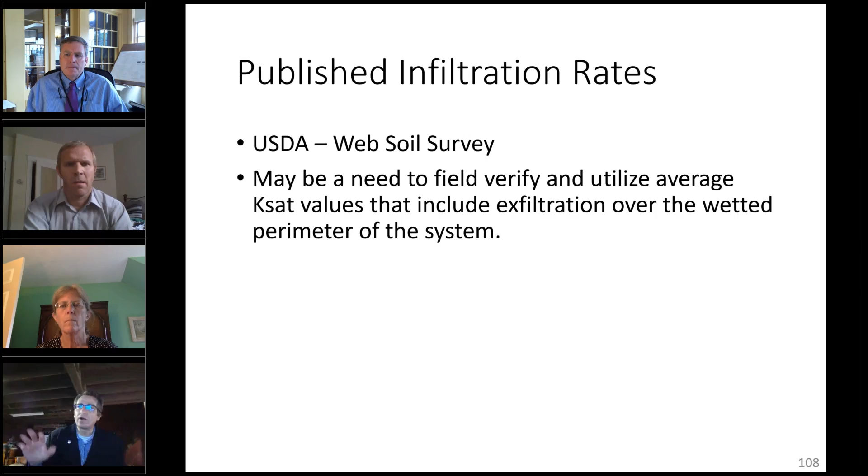Safe to say that stormwater has pollutant load export rates an order of magnitude less than wastewater systems. So we're not dealing with near the concentration, but that said, on average annually we're probably putting more volume into the ground than certainly a septic system. So anyway, it's an area for increased investigation.

There's not a lot of data on stormwater infiltration systems. I did find this 30-year-old study where an infiltration basin was studied in France, and they looked at pollutant concentrations at various points, not only within the system but outside the system. With respect to metals, they largely found that within roughly a foot, in both the vertical and horizontal, those pollutants reduced from relatively high concentrations down to background conditions. So you have high concentrations on the surface, and then within 0.3 meters, roughly a foot, you see a reduction down to baseline conditions across the board.

I anticipate this story looks similar for metals and any other sediment-associated pollutant, hydrocarbons, sediment, phosphorus. Where I don't think it holds is with respect to dissolved pollutants like nitrate or chloride. So here's the big contingency: if you have chloride impairments or nitrogen impairments, you might want to think about discharging water into the ground more carefully if those are your problems. Other than that, I think most pollutants are conservative and are demobilized within a foot or two of the system.

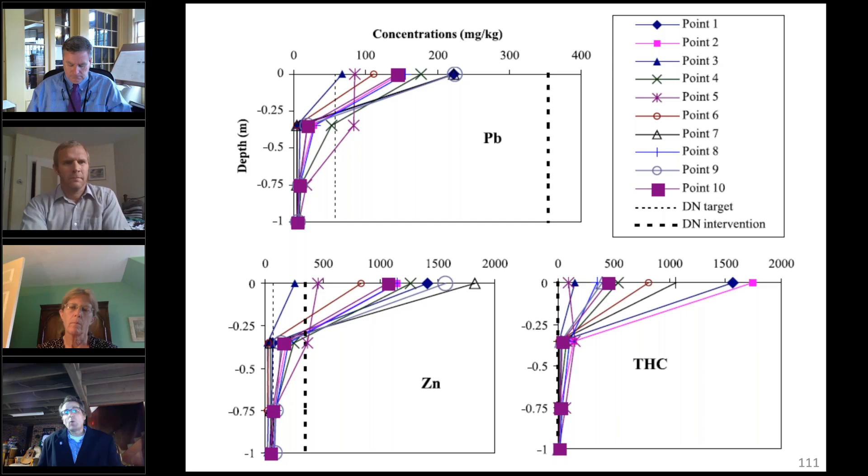There is one of the best literature reviews on this if you're looking for more information. And again, this is just a shot across the bow. This is something that's going to continue to come up as we rely on green stormwater infrastructure to repair the impaired hydrology of our urban areas. Inevitably, we're going to have to put more water into the ground, and this has some potential consequences that largely haven't been well studied. But St. Anthony Falls laboratory at the University of Minnesota has done a literature review looking at the threat of groundwater contamination from infiltration systems, stormwater infiltration systems.

And for the most part, what they show is... where is it? There's like one line in here, I don't know why I have all this verbiage. There's just one line, and it's this right here. It says: the appropriate information regarding the pollution risk associated with choosing infiltration and the often greater pollution risk of not choosing infiltration must be available to optimize and execute appropriate water resource management decisions.

So there's another lit review that University of Connecticut, the NEMO folks, have done that came up with the same exact conclusion: that the risks of not infiltrating are often greater than the pollution risks of choosing infiltration. Just something to consider as food for thought moving forward. If we have permitted entities that are precluding infiltration systems, this possibly has a risk that needs to be leveraged and studied more.

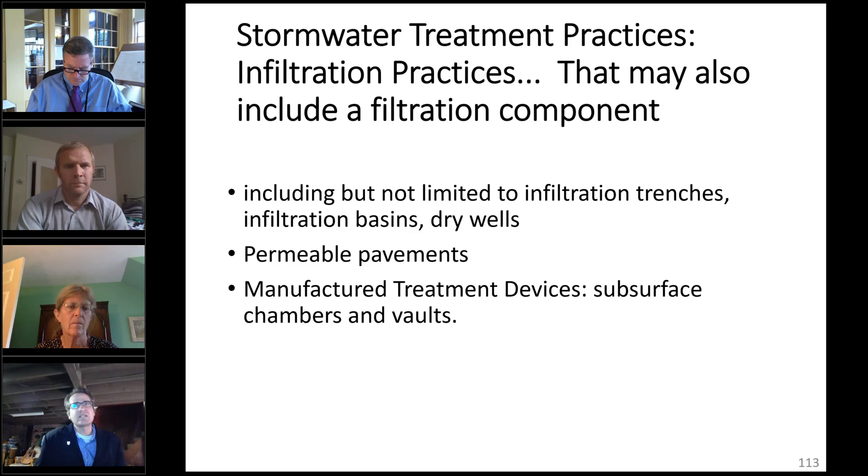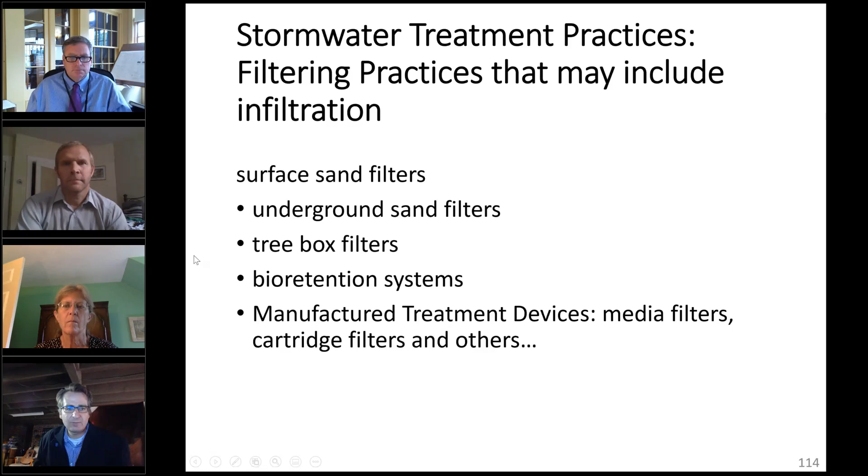So that's kind of the background. I know I'm going kind of fast here because I'm looking at the time and I've got 20 minutes. I did want to talk about really quickly infiltration trenches because there's a permit trigger here.

Infiltration trenches are defined by EPA as those systems which are deeper than they are wide. So most infiltration trenches are narrow, deep reservoirs, and if your infiltration system is deeper than it is wide, it is considered by EPA to be a Class 5 injection well. I am not entirely clear what that means. I know it's an elevated permit threshold, but for the most part, I think you have to report it, and I think it goes on some list somewhere that I've never seen.

So, you know, it's not that simple, obviously. And I don't mean to make light of this, but there is an additional permitting step of a Class 5 injection well if you're installing an infiltration trench. That said, EPA has considered green infrastructure, so anything like a bioretention or bioswale, as long as it has a vegetative component, to not trigger Class 5 injection wells. There's a memo, I think it's like a 2011 memo, from EPA that basically precludes a lot of the green infrastructure like bioswales that could be deciphered as an infiltration trench from triggering Class 5.

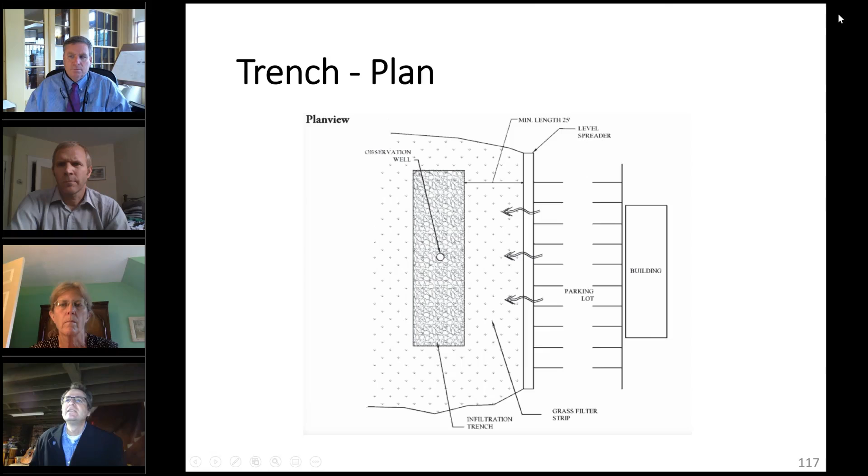All right, that's the note on infiltration trenches. So I'm going to scream through here. Again, infiltration could take the form of a basin, with some soil media, reservoir or not, discharging into good soils potentially. It could be subsurface chambers or subsurface pipe. Again, for the most part, these designs are blind to what creates your void space.

Your void space could be in a basin, it could be in stone, it could be in soil, it could be in chambers, it could be in concrete, it could be in these milk crate structures. That's the only thing—if you've seen them, they're these stackable structures that allow for load bearing capacity but also create tremendous void space at lower cost. Whereas stone, for the most part in the Northeast we use exclusively, but it's also relatively cheap. As you move more and more south, it gets more and more expensive. And it's possible some of these HDPE products or other prefabricated products give you a better dollar per void space delivery.

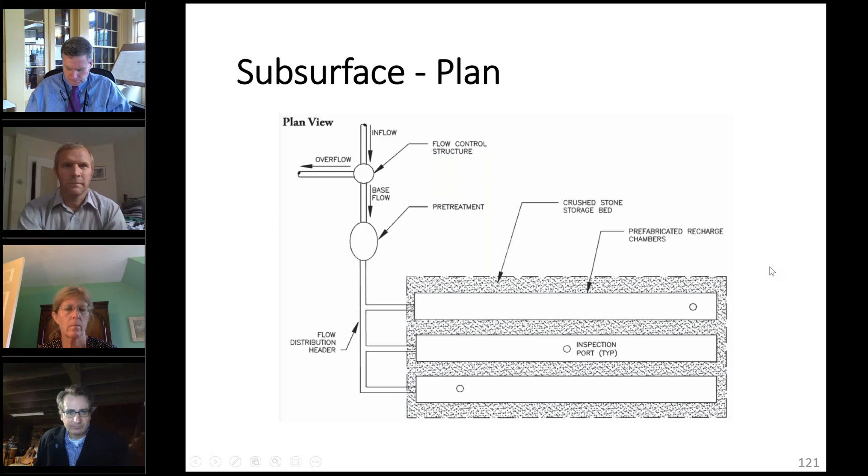Most chambers that go in are kind of taking off as a subsurface system because they're very easy to install. For a pipe system, you need a crane. These large diameter pipes are hard to ship and hard to install. Same thing with large corrugated metal pipes, hard to ship, hard to install, requiring special equipment. These chamber systems can be stacked and can be installed by 2 people.

I think the chamber systems have really taken off as a manufactured treatment device option for subsurface infiltration. For the most part, I would say you need a water quality treatment arm for this.

The first flush generally goes through what the industry calls an isolator row, and this isolator row receives the first flush of water, most laden with pollutants. It has woven geotextile between the chamber bottom and the underlying stone, and it's also wrapped in non-woven textile to block lateral horizontal migration. That becomes your filter and your maintainable component. It also protects the open stone base in the other areas. The chambers, in order to manage peak flow, are just going over open stone, and the isolator row prevents that from clogging because it's maintainable and accessible.

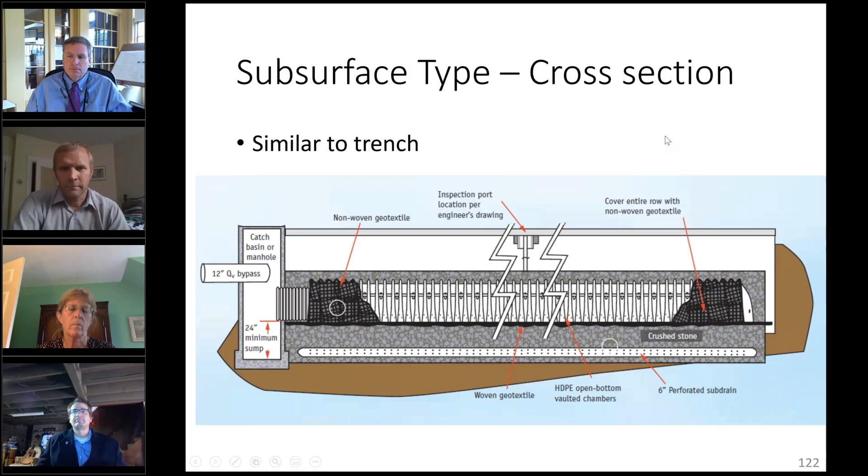Oftentimes there's some type of field assessment, and this area has really exploded: geotechnical investigations and assessment of infiltration capacity of native soils. Back in the day we used to have the double ring infiltrometer, and if you've ever spent time using one, you know the issues. It takes massive amounts of water, and if your soils are even slightly restrictive, it takes hours. For the most part, we've had amoozemeters come out, and there's all kinds of other updated field measurements that are quicker, require less water, and really accelerate, giving you accurate, repeatable infiltration capacity.

I would say the more site-specific data you have, the better. Just relying on USDA soil maps is not really great, and it's no longer really acceptable when siting infiltration systems.

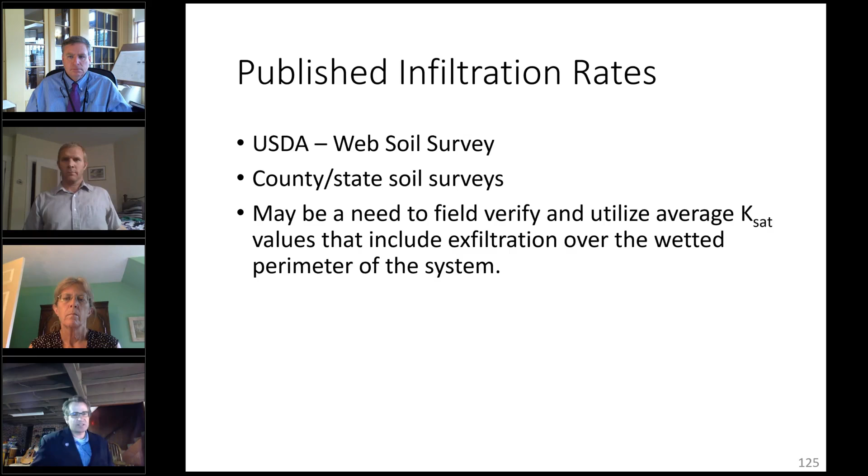All right, permeable pavements. Permeable pavements are innovative. We've used them with great success outside of the poured-in-place pervious concrete in the Northeast. They're relatively inexpensive; a lot of the expense is on the additional site maintenance or site excavation. For the most part, most pavements go in on a sub base of about 18 inches. Typical porous asphalt goes in with a minimum sub base depth of about 30 inches. So that's where a lot of the costs really are. Materials-wise, for permeable pavement versus dense mix asphalt, it's about 20% more, but it's also doubling as your stormwater management strategy, so your pavement surface is your pond.

In a lot of respects, 10 or 15 years in, the word about permeable pavements is they're great, they can be implemented successfully. However, there's a lot of issues with long-term maintenance. On a personal note, the University of New Hampshire has, per capita, probably the most permeable pavements in the Northeast, and we've stopped doing it, largely because we maintain these structures while we study them and then hand them over to UNH facilities, at which point maintenance activity stops. It's not always because it's just ignored.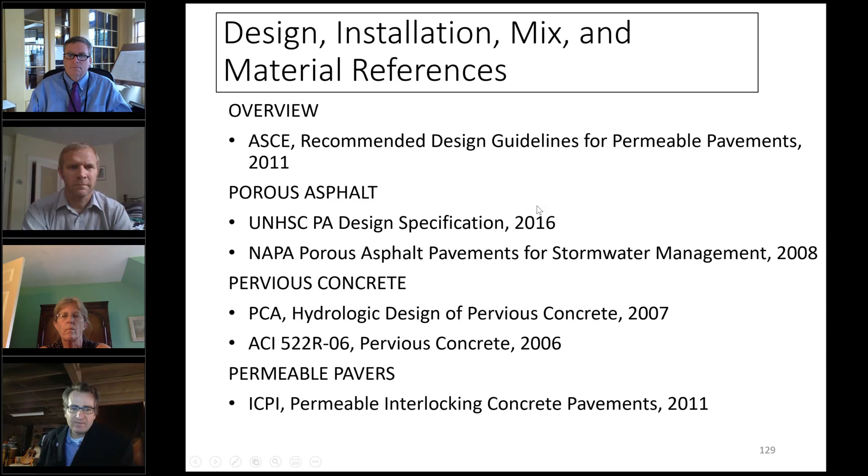So common pitfalls are less in the design for porous asphalt and more in the installation. That's where we see the issues happening. And again, maintenance—oftentimes things don't get maintained. That's another pitfall. We have successfully rehabilitated these pavements though, and I'll show you some data on that. It's just that rehabilitating the infiltration capacity is more expensive than doing routine maintenance. So an ounce of prevention is a pound of cure.

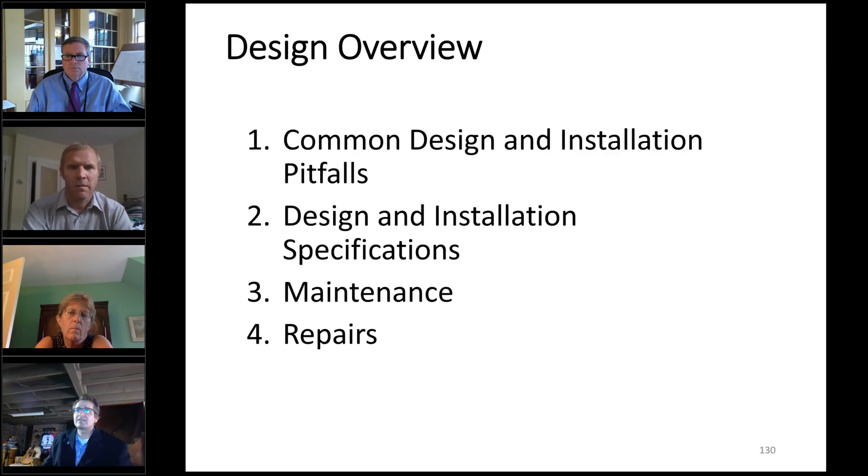So I talked a lot about where to use and not use any infiltration system. Same thing applies. When I look at a porous pavement system, it's no different than an infiltration system. It's just that our surface, our wearing surface, is our hydraulic inlet into our system. So it's really no different than a subsurface chamber—it's a different hydraulic inlet, but the properties of design are pretty much the same.

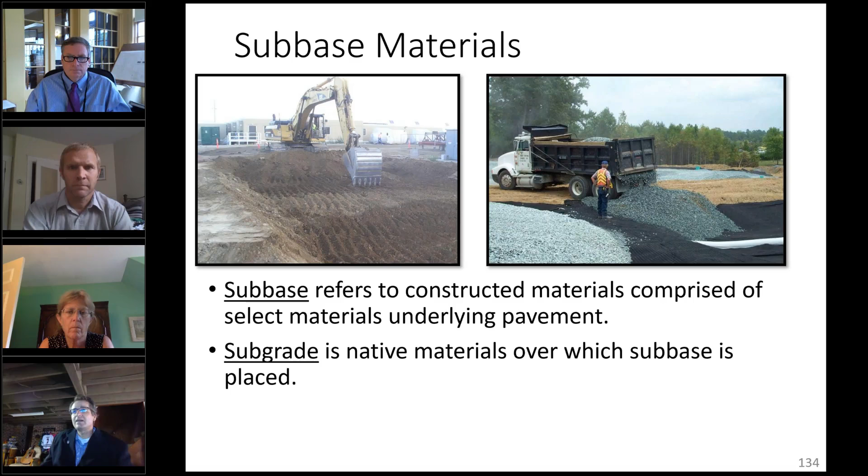All right, I'm going to kind of cruise this, again, for lack of time. For the most part, some of the cold climate considerations are depth of subbase materials. We usually use 2/3—the total system thickness should be 2/3 of the max frost depth. Max frost depth here is generally about 48 inches, so our subbase is about 32 inches, and that's really the design constraint. So when we look at storage capacity within the void space of that 32 inches, it's massive and immense.

So if you're in southern climates or you don't have this frost depth penetration requirement, then you should be sizing your subbase again to store your volume, your instantaneously generated water quality volume.

Lots of questions out there on porous pavement. I'm sure I'll see them in the chat, and hopefully I'll leave a little time to get to them.

We have a whole specification on our website. If you're interested, it walks you through the design, the installation, and some of the oversight that needs to be done.

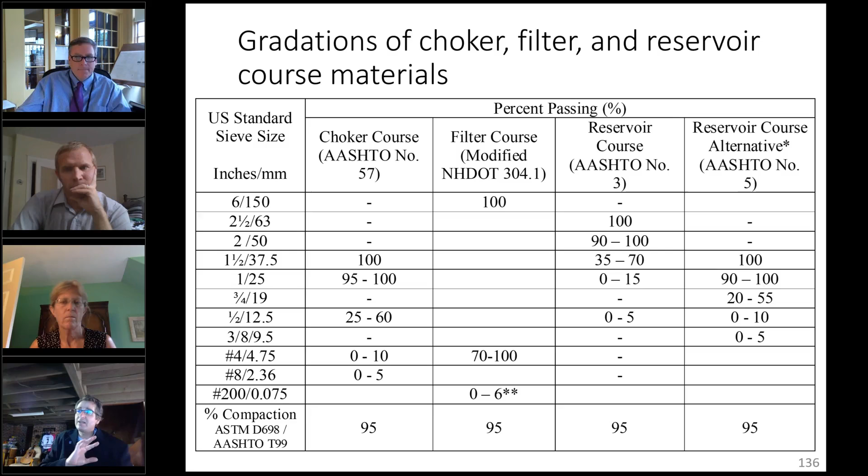Primarily, oversight is maintaining infiltration capacity of your reservoir course and its temperature thresholds, because the asphalt binder cools a lot quicker since it has less thermal mass. The aggregate used eliminates pretty much any of the fines, so there's no sands, it's a coarse open graded aggregate, and thus it cools really quickly. That's really what we're always combating during installation.

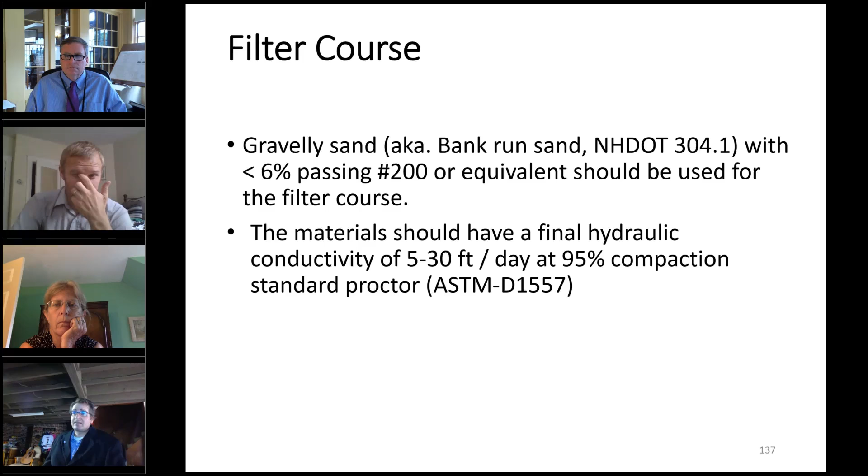A contractor that doesn't know what they're doing will line up the trucks, because that's what you can do with dense mix asphalt. For porous asphalt, within an hour and a half that stuff starts cooling, and once it gets to about 165 degrees Fahrenheit you really can't use it. You should be rejecting the mix, because that's around cessation temperature - it's not going to compact, and they do not like it when you reject a mix.

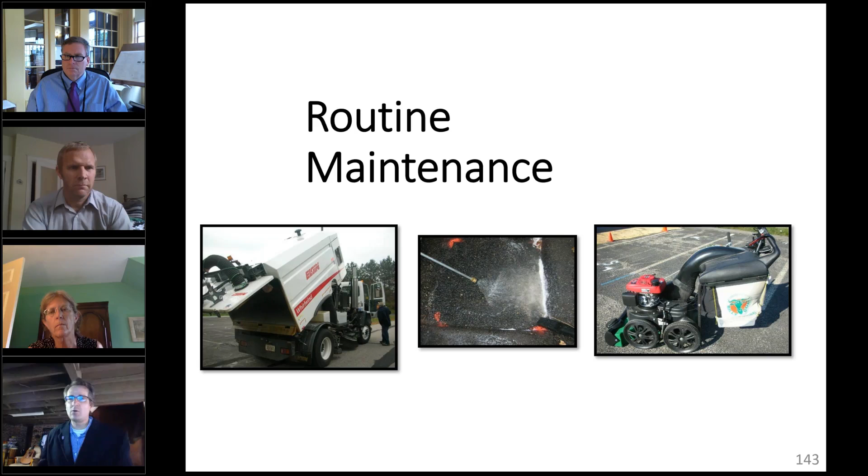I want to end with maintenance, because one of the biggest things is the advance in sweeping technology. We had the privilege of being a testing site for this new high efficiency vacuum sweeper called TriVerus. There's other vacuum sweepers out there, like Stormwater Compliance, out of Falmouth, Maine.

They call theirs - what is it called - the regenerative, the RVP something. They have their own system. These are really high efficiency sweepers, and they're pretty amazing. They've restored my faith that we can regenerate long clogged infiltration capacity of pervious pavements. This one has a high efficiency vacuum jet on the front.

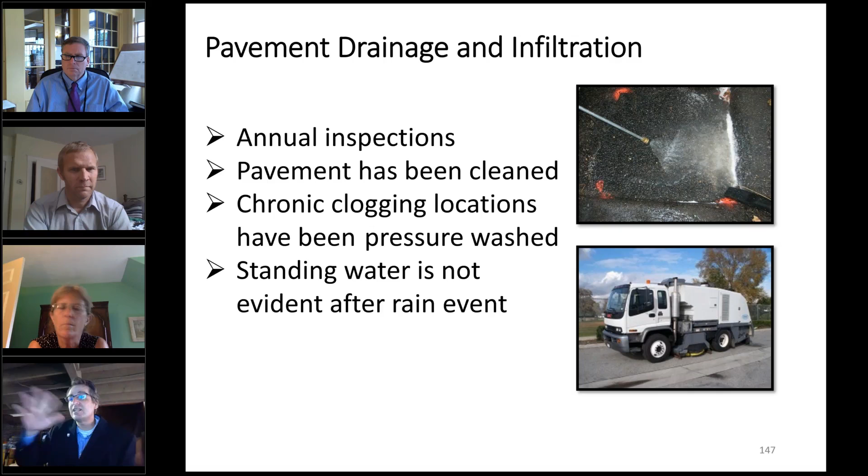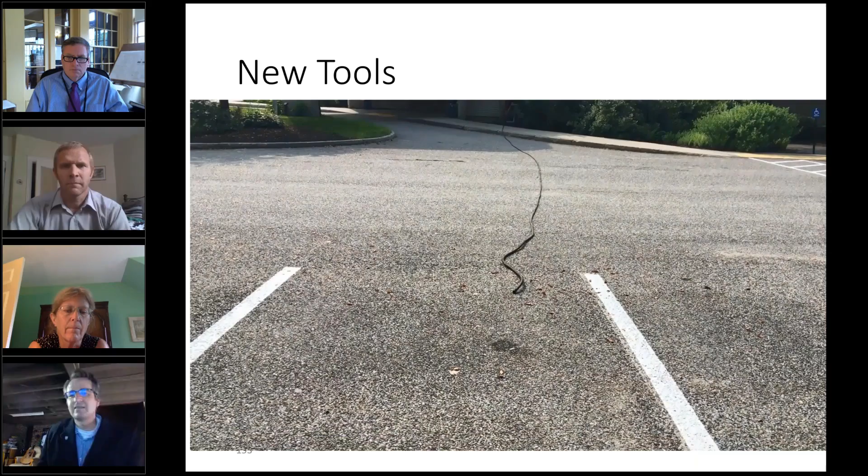Okay, here we are at the Elliott Alumni Center, doing our cleaning. So I'm just showing you initially - this is the runoff from a clogged pavement. Time of concentration of about 3 minutes and 20 seconds for the water, which is not infiltrating, to make it all to the drain grate here, which again we add as belts and suspenders.

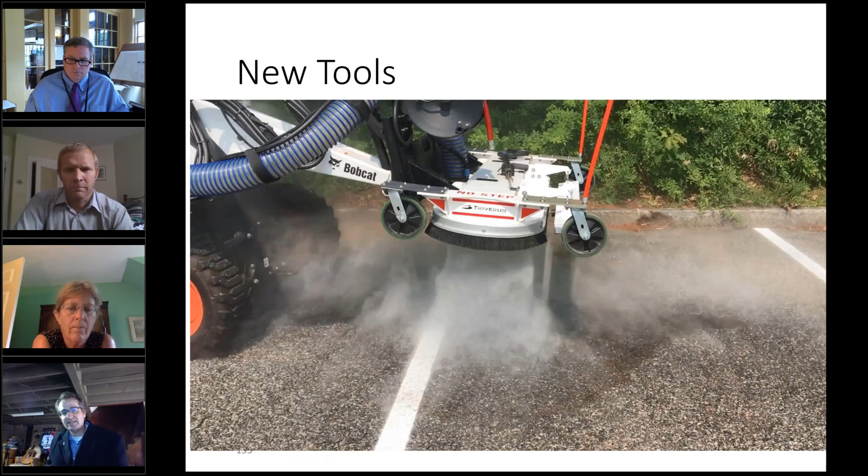So there's the TriVerus. This has a high efficiency rotating pressure washer on the front and a high efficiency vacuum on this aperture that you see. There's the jets, the circulating jets - really, really impressive. And this is afterwards, same hose, same infiltration rate, and essentially that's the limit of the flow.

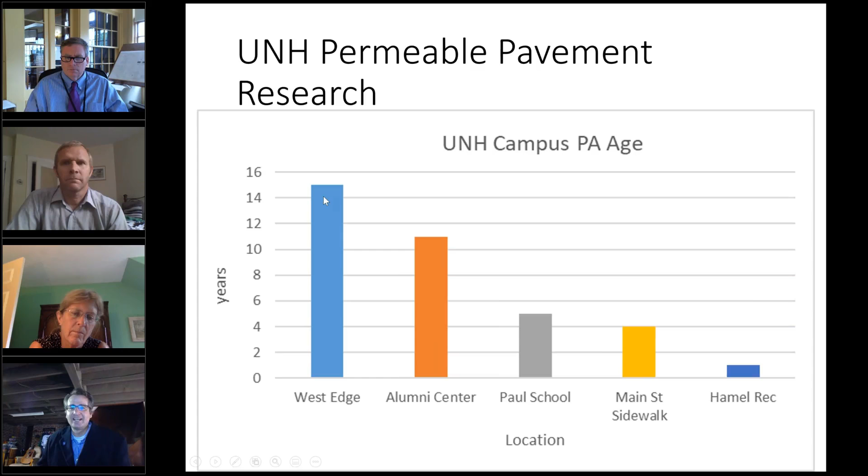If we look at infiltration rates, it's almost the inverse, right? Anything below 10 inches an hour, we're considering failed, because the method we use is C1701, an ASTM method for porous pavements, and there's some leakage out of just the equipment - you can't get 100% leakage. So 10 inches an hour is basically clogged.

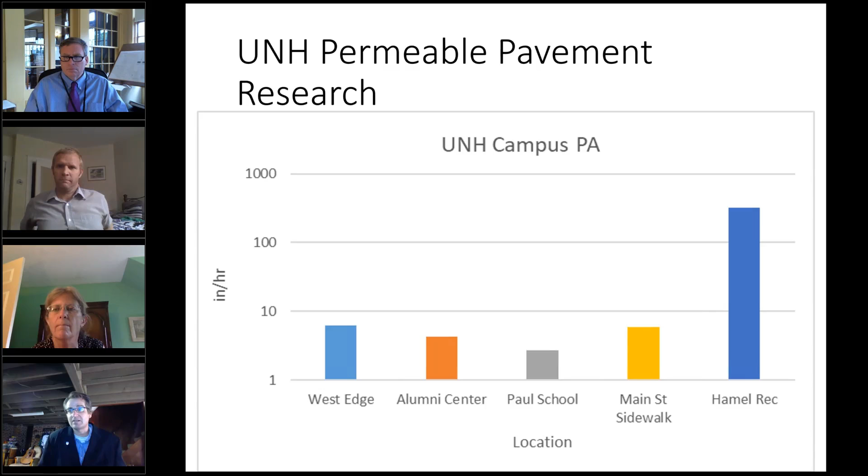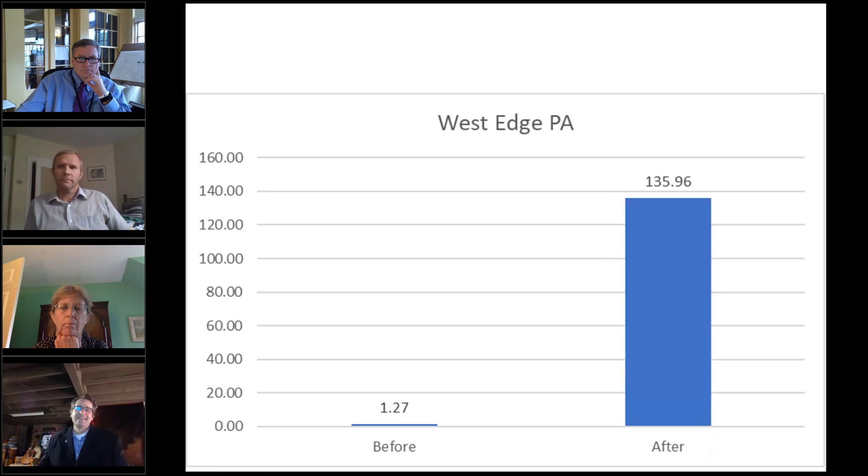All right, I'm gonna end there because I think I'm out of time. I apologize for issues in the beginning, but hopefully I will stay around if folks have questions, and I'll feel free to answer them. Thank you for your time and attention, and hopefully this was useful.